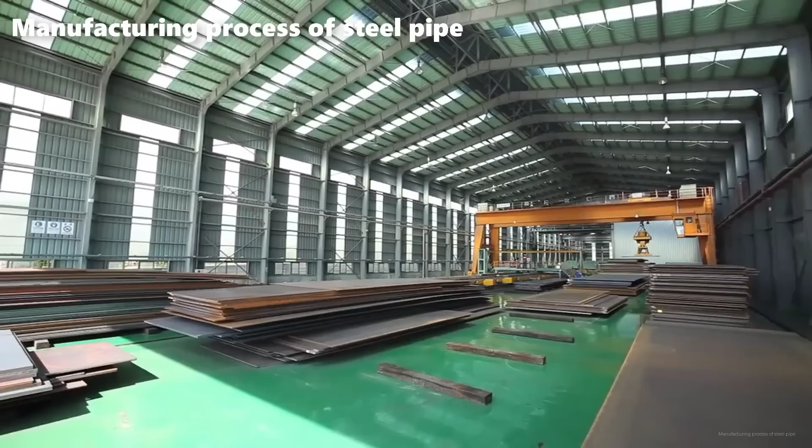The process begins with the raw materials, steel coils. These coils are typically stored in large warehouses. To start the manufacturing process, a magnet lifter is used to safely and efficiently transport the steel coils to the next processing stage.

Once the steel coils are in position, they go through an edge milling machine. This machine is designed to remove any irregularities or imperfections from the edges of the steel strip, ensuring a smooth and uniform surface. It also trims the edges to the required width.

After edge milling, the steel strip is passed through a pre-bender machine. This machine pre-bends the edges of the strip to the desired curvature, making it easier to form into a circular shape in later stages. The pre-bent steel strip is then fed into the infeeder machine.

This machine guides the strip into the next critical step, the JCO, J-ing, C-ing, and O-ing press bending machine. This machine takes the pre-bent steel strip and transforms it into the fundamental U-shaped configuration. The hydraulic forces exerted on the steel strip gradually mold it into this U-shaped form, laying the foundation for the eventual creation of the pipe.

The accuracy and consistency achieved by the JCO press bending machine are essential for ensuring that the pipes meet strict dimensional and structural requirements, ensuring their integrity and performance in various applications.

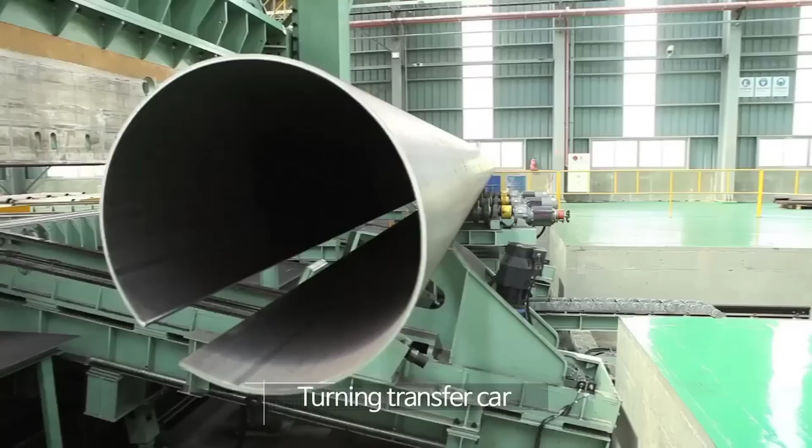Once the U-shaped steel is formed, a turning transfer car moves it to the next stage. This car rotates the steel section to prepare it for welding.

In this step, the U-shaped steel is tack welded along its length. Tack welding holds the steel section in its circular shape temporarily, allowing for further processing.

The tack-welded steel section is then passed through an inside welding machine. This machine creates a continuous weld seam along the inside of the steel section, ensuring a strong and leak-proof joint.

After the inside welding, any excess weld material or imperfections are removed using a back bead cutting machine. This step ensures a smooth interior surface, which is essential for efficient fluid flow and reduced friction.

The exterior welding process is similar to inside welding, but is done on the outer surface of the steel section. It creates a continuous weld seam along the outside, strengthening the pipe's structure.

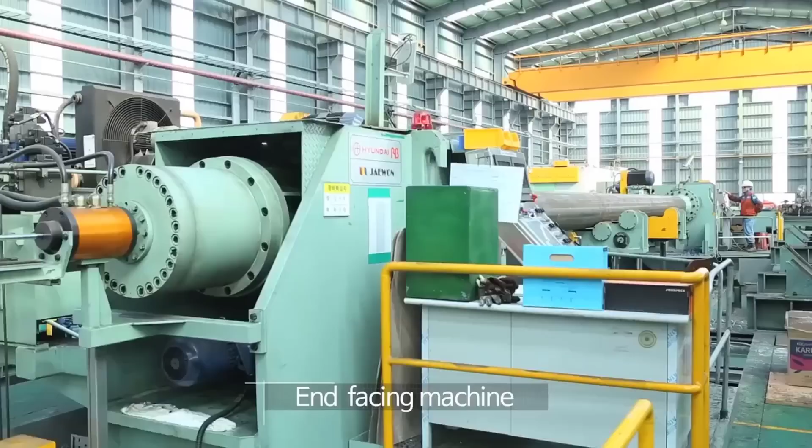To prepare the pipe ends for connection or welding with other pipes, an end-facing machine is employed. It trims and bevels the pipe ends to the specified angle and dimensions.

Before proceeding to the final inspection stage, the pipes go through a washing device to remove any contaminants and ensure cleanliness. Pipes are examined for any internal defects, weld quality, and dimensional accuracy using X-ray technology. This ensures that the pipes meet the required quality standards.

After successfully passing the X-ray test, the steel pipes are ready for packaging and shipment to customers. This comprehensive manufacturing process guarantees the production of high-quality steel pipes that meet industry standards and perform reliably in various applications.

The production begins with the automatic feeding of bars into the production line. A specially designed magazine ensures a continuous supply of bars, which are the initial raw material for the bullet shell manufacturing process.

The bars are then subjected to inductive heating using the BBC Brown Boveri installation. This installation, with a power of 1,450 kilowatts and a heating frequency of 500 Hz, employs electromagnetic induction to heat the bars uniformly. This controlled heating process enhances the malleability of the steel bars, making them more amenable to subsequent shaping.

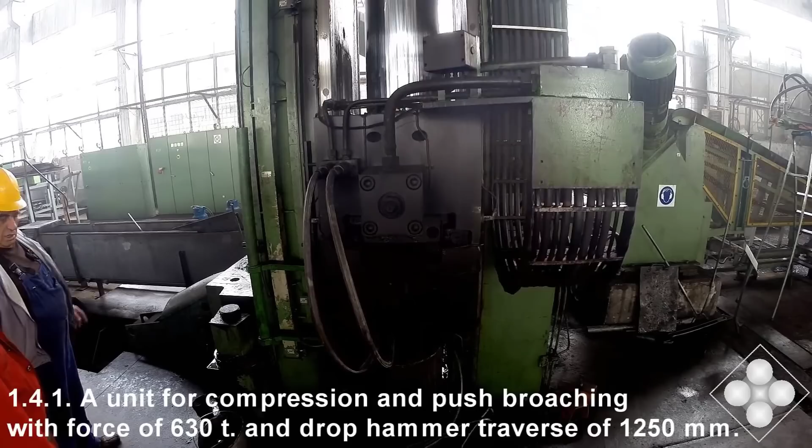The heated steel bars, now pliable, are passed through a FICEP hydraulic press shear. This hydraulic press shear is equipped to cut through bars with diameters of up to 130 millimeters. This step is crucial in obtaining uniform lengths of the heated bars for further processing.

The cut bars are then forwarded to the EUMUCO hydraulic press, where the actual forging of the steel shell casings takes place. This press consists of 2 units working in tandem.

One unit of the EUMUCO press focuses on compression and push broaching. With an impressive force of 630 tons and a drop hammer traverse of 1,250 millimeters, this unit shapes the heated steel into preliminary casing shapes. The intense force exerted ensures the formation of accurate and precise designs.

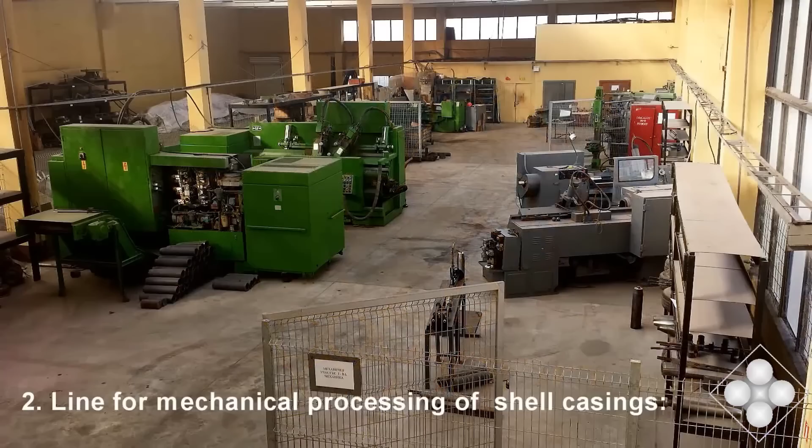The second unit of the EUMUCO press is responsible for the drawing process. Equipped with rolls and rings, this unit calibrates the forged shell casings to achieve the desired dimensions. The force applied is 200 tons, and the drop hammer traverse extends to 3,200 millimeters, allowing for intricate shaping.

Once the forged shell casings are shaped, a robotized stacker arranges the hot casings onto pallets. This automated stacking process ensures efficient and consistent arrangement, preparing the casings for normalization.

The normalized shell casings then proceed to a line dedicated to their mechanical processing, where precision and accuracy are paramount. Within this line, the GF programmable hydrocopying lathe takes center stage. This advanced machine is designed for shell casing turning with exceptional efficiency. The lathe's programmable nature allows for precise control over the turning process, ensuring uniformity and quality across all casings.

To sustain the production flow, an automated magazine for billet charging is employed. This magazine ensures a constant supply of billets for processing, streamlining the entire production process.

In an auxiliary role, an EMA Elektro-Maschinen-Schultz GmbH inductive heating unit, with a power of 375 kilowatts and a frequency of 1,000 Hz, contributes to heating and shaping specific components of the bullet shells.

For specialized bending of shell casings, the Usine de Wecker vibrating forging press comes into play. This press introduces controlled vibrations to achieve precise bends in the shell casings as needed.

The journey of a razor blade begins with the pressing of raw materials. Typically, stainless steel strips are cut into smaller blanks, which are then subjected to a high-pressure pressing process. This initial step shapes the blanks into the fundamental blade structure.

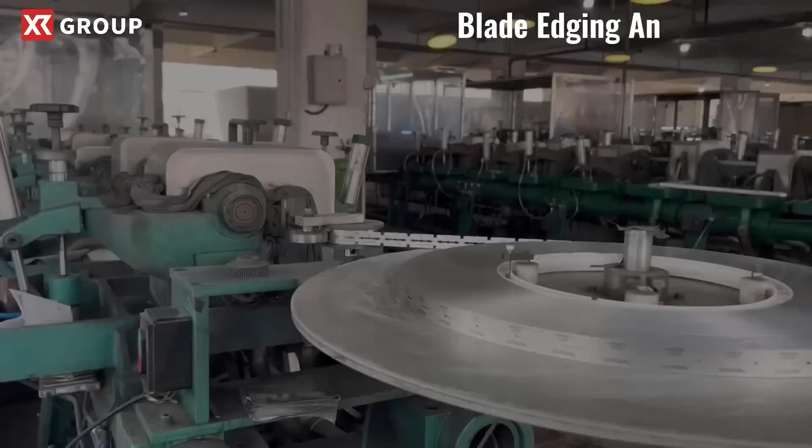To achieve the razor-sharp edge that consumers expect, the blades must undergo precise edging and polishing. Advanced machinery and abrasive materials are used to refine the blade's edge, ensuring it is both sharp and smooth.

Quality control is paramount throughout the production process. Skilled technicians inspect each blade for defects, imperfections, or deviations from the required specifications.

Blade coating is an important step that enhances the blade's performance and prolongs its life.

Sintering is a critical process that involves heating the blades to high temperatures to further strengthen the metal's crystalline structure. This step ensures the blade remains durable and sharp throughout its lifespan.

To guarantee the blades meet stringent quality criteria, a sharpness test is conducted. This test measures the blade's cutting ability, ensuring that it can provide a close and comfortable shave without causing irritation or nicks. Razor blades are susceptible to corrosion, which can significantly reduce their lifespan.

To prevent rusting, the blades are carefully soaked in anti-rust oil. This protective coating ensures the blades remain in pristine condition until they reach the hands of the consumer.

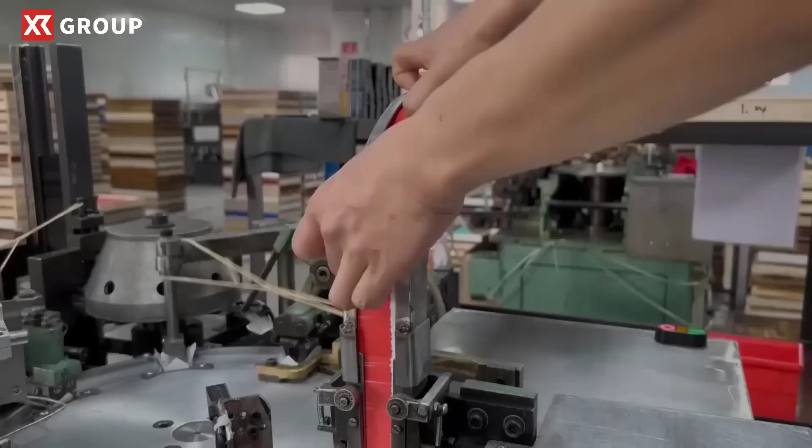Once the blades have passed all quality checks and treatments, they are carefully packaged. Packaging materials are chosen to maintain the blade's hygiene and sharpness until they are opened and used by the consumer.

Once the steel sheets are flattened, they are cut into specific sizes according to the required drum dimensions. This is usually done using a shearing machine or a laser cutting machine.

The cut sheets are then transferred to a forming machine, where they are shaped into cylindrical bodies. The forming machine utilizes a series of rollers and presses to shape the sheets accurately.

The first step is to design the lid according to the specifications and requirements of the barrel. This includes determining the lid's dimensions, shape, and any additional features such as handles or vent holes.

The iron sheets are fed into a stamping press, which consists of a hydraulic or mechanical system capable of exerting high pressure.

Once the initial stamping is complete, the lid may require additional processes such as trimming and piercing. Trimming removes any excess material from the edges of the lid, ensuring a clean and precise shape.

After stamping, the lids undergo surface treatment to protect them from corrosion and enhance their appearance. The surface treatment can include cleaning, degreasing, and applying coatings such as paint, powder coating, or galvanizing.

After the cylindrical bodies are formed, the next step is to join the two ends of the body to create a drum. This is done through a process called seaming.

The edges of the cylindrical bodies are folded and interlocked, creating a secure and leak-proof joint. The seaming process is usually automated, using specialized seaming machines. In addition to seaming, welding may also be employed to strengthen the joint further.

Once the seaming process is complete and the cylindrical body of the steel drum is formed, it requires the addition of a bottom and top ring for structural stability and reinforcement. These rings play a crucial role in ensuring the overall integrity and durability of the drum.

The bottom and top rings are typically made of thicker gauge steel compared to the drum body. This is done to provide enhanced strength and rigidity to the drum, as the rings are subjected to significant stress and impact during handling, stacking, and transportation.

In this stage, the various components of the steel drum, including the body, bottom and top rings, closure mechanisms, and handles, are assembled. The closure mechanisms can include various options such as bolted rings, lever lock closures, or drum plugs. Once assembled, the drums undergo rigorous testing to ensure their integrity, including leak testing, pressure testing, and load testing.

Before painting, the barrel's surface needs to be properly prepared. This typically involves cleaning and removing any dirt, oil, rust, or old paint. Surface preparation can include methods such as sandblasting, chemical cleaning, or mechanical abrasion to ensure a clean and smooth surface.

To enhance adhesion and improve paint durability, a primer is applied to the surface. The primer acts as a bonding agent between the metal surface and the paint layer. It also provides additional protection against corrosion. The primer is evenly sprayed or applied using a brush, ensuring complete coverage.

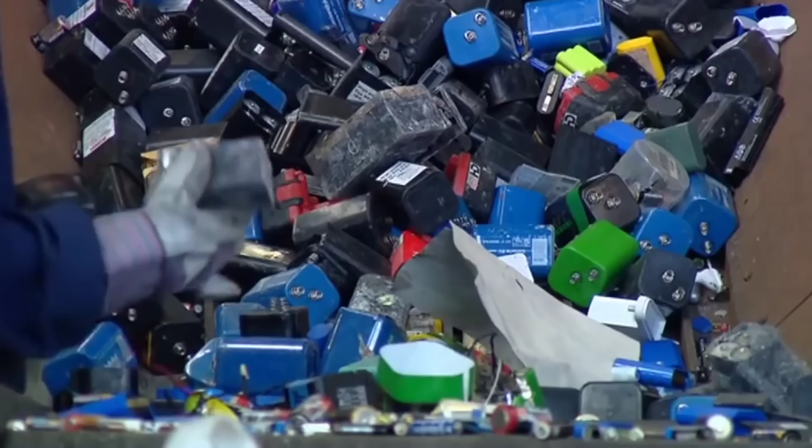After this initial sorting, the different types of batteries are further sorted manually. Lead batteries are separated from lithium batteries, and consumer batteries, including both non-rechargeable primary batteries and rechargeable secondary batteries, make up the majority of the batteries treated in this facility.

During the sorting process, any electronic waste, cable foils, and foreign materials that are not part of the battery composition are removed. Even small button batteries containing mercury are sorted out and processed separately.

Once the batteries have been sorted, the consumer batteries are further separated based on their metal content, including alkaline, iron, zinc, and manganese. The recycling process begins by filling each group of consumer batteries into containers, which are then mixed in equal proportions.

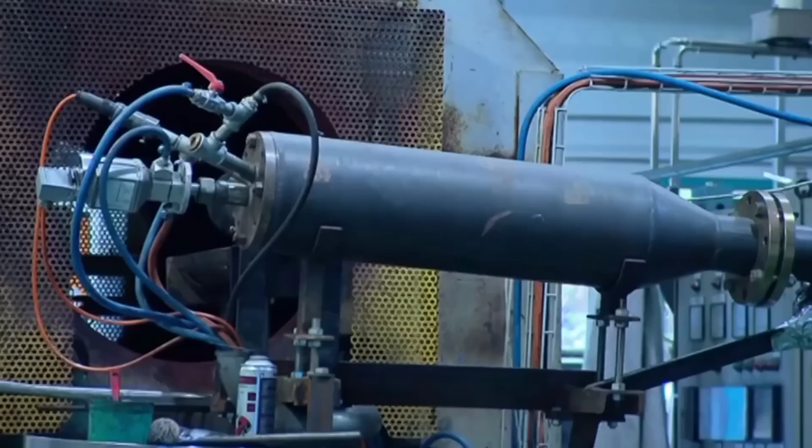The container mixture is subjected to pyrolysis in an oven heated to 700 degrees Celsius. During this process, certain ingredients are dissolved from the battery materials, water evaporates and is removed, and paper, plastics, and coal burn. To ensure safety, highly toxic furans and dioxins are filtered out.

Through pyrolysis, valuable materials are obtained. Zinc, which constitutes around 23% of a consumer battery, is skimmed off and processed in zinc smelters. The extracted zinc has its own value listed on the stock exchange.

In some batteries, mercury is released during pyrolysis, and it is captured in filters. Due to its highly toxic nature, mercury must be treated separately. In a separate facility, the mercury is separated from the filters and button batteries, and it is collected in its pure form for return to the industry.

After pyrolysis, consumer batteries may appear as charred scraps since some materials have already been removed. However, they are valuable homogeneous materials. A final processing step takes place in another melting furnace, which reaches a temperature of 1500 degrees Celsius, twice as high as the first facility.

At this point, the molten metal is tapped by workers wearing asbestos protective clothing. The molten mass flows into molds and cools within minutes. The resulting product is a metal alloy called ferromanganese, composed of iron and manganese. Ferromanganese is commonly used in the metal industry to regulate the hardness of steel.

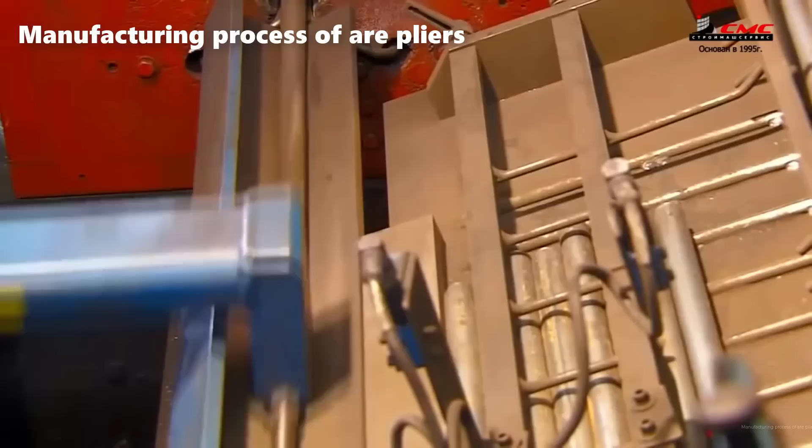This intricate process begins with a metal blank, the starting point for all parts. Skilled metalworkers kick off the transformation in a potent electric melting furnace where steel is rapidly heated to extreme temperatures. Within seconds, the metal reaches a malleable state, ready for its metamorphosis.

Subsequently, the heated steel is carefully placed onto a stamped mold, and an immense press exerts tons of force, shaping the blank into the desired form. It's a meticulous process that may require up to 4 strikes for each blank to achieve its final shape.

To ensure the pliers' strength and durability, they undergo a crucial heat treatment process known as hardening. The plier halves spend a grueling 2 hours inside a gas furnace, where temperatures soar beyond 800 degrees Celsius. Following this, they are rapidly and uniformly cooled by immersion in salty water.

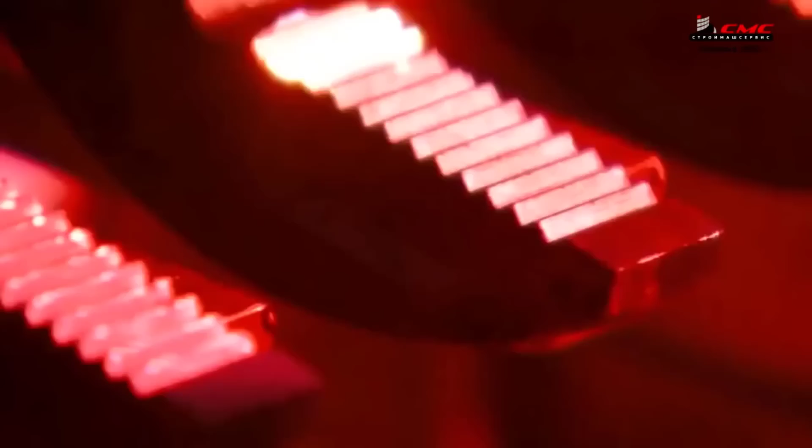These teeth on the pliers, designed to withstand heavy-duty tasks, receive additional fortification through laser treatment, enhancing their hardness and toughness.

Now the pliers are ready for the assembly phase. Creating a pair of pliers is relatively straightforward. A worker inserts a pivot and joins both halves. Then, the pivot is securely fastened at high speed using a machine that applies significant force and friction.

The process differs slightly for slip joint pliers. These tools undergo a unique treatment, beginning with placement under a press that employs heat and high pressure to firmly clamp the pivot. Workers then insert the slip joint pliers between two grinding wheels using an emulsion to prevent overheating. The pivot is ground down until it becomes level with the surface of the pliers.

Subsequently, these pliers are sent to a gas furnace for another 2-hour heat treatment, a crucial part of the tempering process. After removal from the furnace, they are immersed in an oil solution, a departure from the rapid cooling in salty water employed for regular pliers.

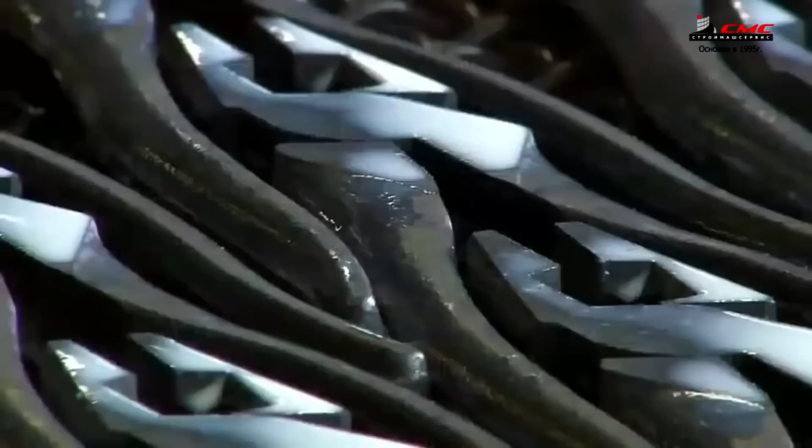Steel is an exquisite material, making meticulous heat treatment essential to avoid compromising its quality.

Post-heat treatment, the pliers are immersed in a bath filled with an anti-corrosion solution, safeguarding the steel from rust while lubricating the pivot. A robotic arm takes charge, lifting the pliers to a grinding belt that smoothens all surfaces except the handles. Subsequently, the company's logo and product number are etched onto the pliers with precision using a laser.

Before dipping into liquid vinyl, hundreds of pliers are preheated to ensure the coating adheres seamlessly to the steel. This protective coating hardens when exposed to heat and remains on the handles, enhancing their grip and usability.

The first step in the wrench manufacturing process is the selection of the appropriate raw materials. Wrenches are typically made from high-strength steel alloys. The choice of material depends on the desired properties of the wrench, including strength, durability, and resistance to corrosion. Alloy steel is a common choice due to its excellent balance of strength and toughness.

The forging process is a critical step in the production of wrenches. After carefully selecting the raw steel materials, they are subjected to intense heat, typically at temperatures exceeding 2000 degrees Fahrenheit, 1093 degrees Celsius. This extreme heat makes the steel more malleable, allowing it to be shaped with precision.

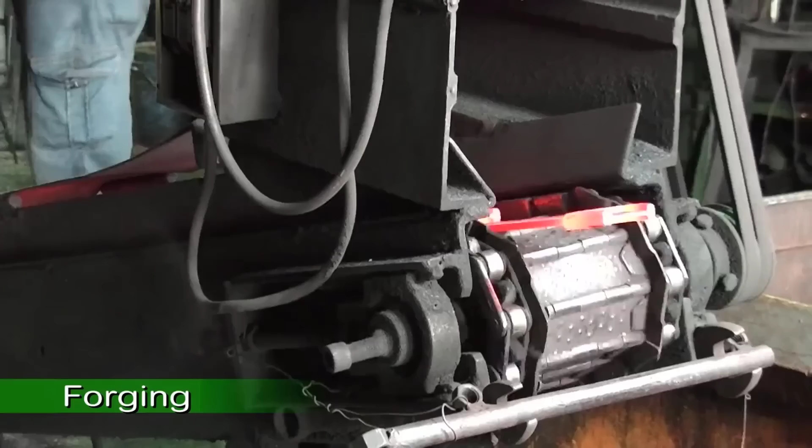Once at the correct temperature, the steel is placed in specialized dies and subjected to immense pressure. This pressure forces the steel into the desired shape, aligning its grain structure in the process. This alignment enhances the mechanical properties of the steel, significantly increasing its strength and durability.

After forging, the rough wrench blanks undergo chemical grinding. This process involves removing excess material and refining the shape of the wrench heads. Chemical grinding ensures that the wrenches have precise dimensions and a smooth, uniform surface.

Polishing follows chemical grinding, where the wrenches are carefully smoothed to achieve a high-quality finish. This step not only enhances the wrench's appearance, but also prepares the surface for subsequent processes, such as plating.

Stamping is a crucial step in the wrench manufacturing process, as it involves imprinting important information on the wrench, such as the brand name, model number, and size. This information is essential for product identification and traceability.

Heat treatment is another critical process used to enhance the mechanical properties of wrenches. Wrenches are heated to specific temperatures and then rapidly cooled to achieve the desired hardness and toughness levels. Proper heat treatment ensures that the wrenches can effectively grip nuts and bolts without breaking or deforming.

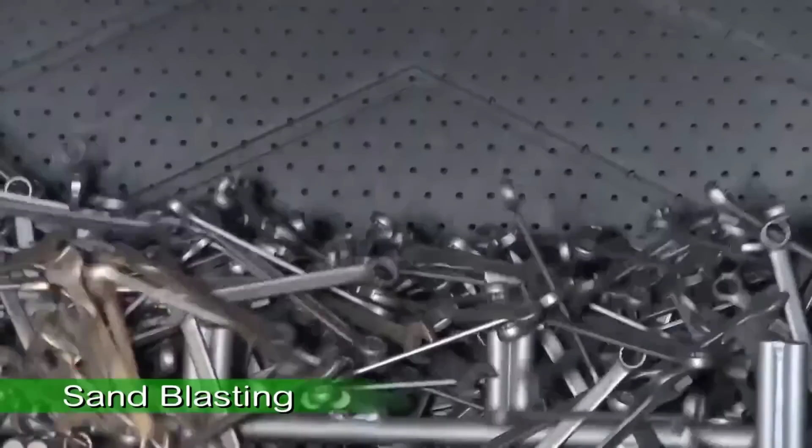Sandblasting is employed to prepare the surface of the wrenches for plating. This process involves propelling abrasive particles against the surface at high velocity, effectively removing any remaining impurities and creating a textured surface that promotes adhesion during the plating process.

After sandblasting, another round of chemical grinding may be necessary to refine the surface further. This ensures that the wrenches are free of imperfections and have a smooth, uniform finish. In this step, the open end of the wrenches is precisely ground to create the distinctive profile and functional features. Open-end grinding ensures that the wrenches have the correct geometry for effectively gripping nuts and bolts.

Prior to plating, the wrenches undergo a thorough cleaning process to remove any residual contaminants, oils, or residues. This step is crucial to ensure the plating adheres properly and produces a durable, corrosion-resistant finish.

Plating is a critical surface treatment that enhances the wrench's corrosion resistance and appearance. Chrome plating, for example, not only provides a protective layer but also imparts a shiny finish to the wrenches. Different plating methods and materials may be used based on the specific requirements of the wrenches and market demands.

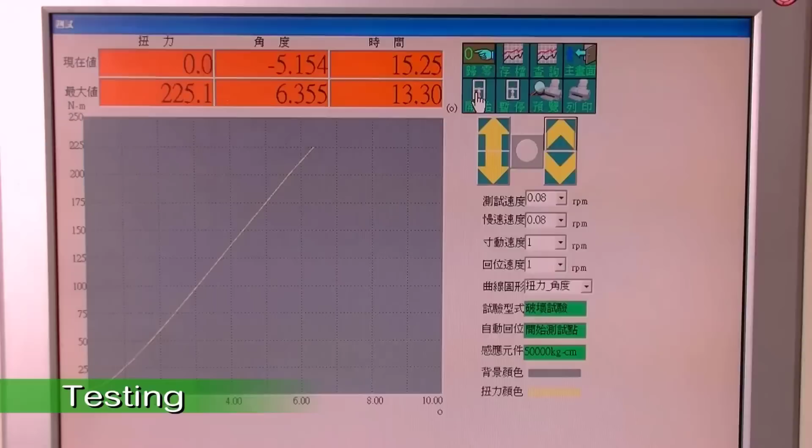Quality control is paramount in the wrench manufacturing process. The finished wrenches undergo rigorous testing to ensure that they meet specified standards. Testing may involve dimensional measurements, hardness testing, torque testing, and visual inspections. Each wrench must pass these tests to ensure that it will perform reliably in various applications.

Once the wrenches have passed all quality checks and inspections, they are carefully packaged for distribution. Packaging methods can vary depending on the intended market and customer preferences.

The process begins with a round bar, or preform, which is heated to the appropriate forging temperature. The heated material is then fed into the ring blank press, where it undergoes several operations. The press exerts immense force to compress and shape the material into a cylindrical shape, thereby forming the initial ring blank. The ring forging machine Radial 8005001, manufactured by SMS Meer, is a highly advanced piece of equipment used for the process of ring rolling.

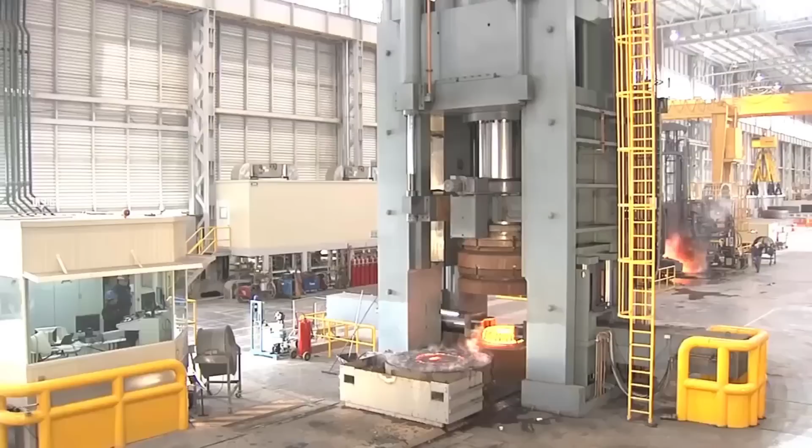The heated workpiece is carefully placed into a specialized machine known as a ring blank press. The ring blank press is designed to apply immense pressure to the heated material, using a series of compressive forces. The workpiece is positioned between two die halves or platens within the press.

As the press closes, the material is subjected to extreme pressure, causing it to deform and take on a cylindrical shape. This intense pressure facilitates the formation of the initial ring blank with the desired dimensions.

The pressing operation in the ring blank press is crucial in shaping the material accurately and achieving the required cylindrical form. The amount of pressure applied and the duration of the pressing process are carefully controlled to ensure the workpiece reaches the desired shape while maintaining the necessary structural integrity.

The ring blank press plays a vital role in the initial stages of the ring rolling process, providing the foundation for subsequent steps. Once the ring blank is formed, it is transferred to the ring rolling machine, where it undergoes further deformation and shaping to achieve the final rolled ring product.

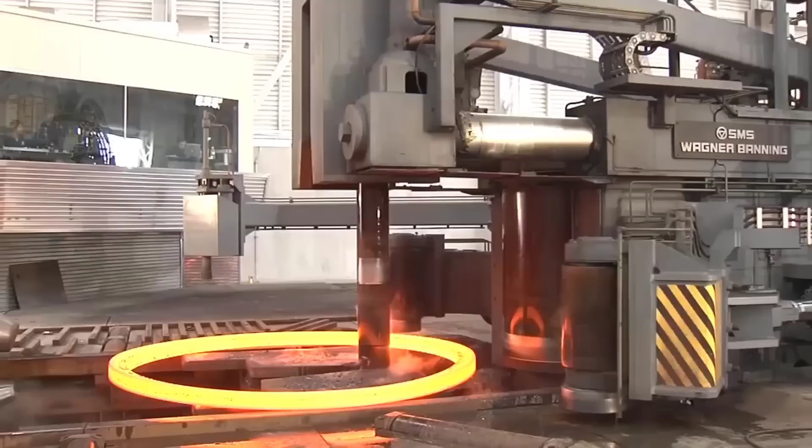This controlled deformation results in a ring with precisely controlled wall thickness and diameter. The axial profiling technology also permits the production of complex shapes and profiles within the rolled rings. By adjusting the axial forces and roller movements, the machine can create flanges, grooves, and other intricate features as per the desired specifications.

The RAW 8000 5001, designed for high productivity, boasts a rolling capacity of up to 8,000 mm in diameter and 500 mm in height. The machine operates at high speeds, facilitating efficient production of rings in both large and small sizes.

Watering is usually done through watering systems integrated on the rolling mill. Water is sprayed onto the material and the contact area between the material and the rollers to ensure effective cooling and lubrication. Through the use of water, ring rolling can be performed with high efficiency, and a better final winding quality is achieved.

The steelmaking industry is known for its rigorous demands on equipment reliability, product quality, and overall plant availability. In this context, robust and dependable drive technology plays a crucial role in achieving high-quality steel products and ensuring uninterrupted plant operations over decades.

One company that has excelled in this field is SMS SIEMAG, which specializes in the development, design, and manufacturing of drive systems and components for steelmaking plants and rolling mills. SMS SIEMAG's drive solutions are a product of the synergy between metallurgical plant know-how, rolling mill technology, and cutting-edge gear design. The company's commitment to quality and innovation is reflected in its product range, which encompasses all drive systems required for both hot and cold rolling mills, as well as steelmaking plants.

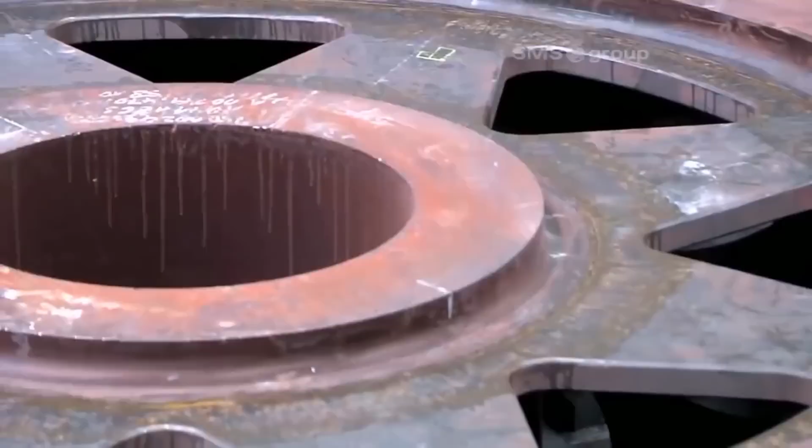A cornerstone of SMS SIEMAG's approach is its emphasis on producing essential drive components in-house. Their main drive gears, mill pinion gears, twin drive gear units, and other critical components are developed and manufactured entirely at their facilities in Germany. This vertical integration allows the company to maintain strict quality control and ensure short delivery times for their customers.

Recent investments of over 80 million euros have been directed towards expanding SMS SIEMAG's Hilchenbach workshop. This expansion includes the establishment of a new gear-making shop, which consolidates major manufacturing steps for large gear units. With state-of-the-art machinery, this workshop can fabricate gears with modules up to 40 and diameters up to 6 meters.

The manufacturing process starts with mechanized submerged arc welding, followed by stress relief and precision milling under qualified supervision. The case hardening process is a pivotal step as it imparts durability to the gears.

This is exemplified by the case hardening of a double helical spur gear weighing approximately 45 metric tons and boasting a diameter of 4.5 meters. Ultrasonic testing of gear teeth ensures their quality, followed by tooth flank grinding on profile grinders. The resulting gears undergo high-precision testing on dedicated gear measuring machines.

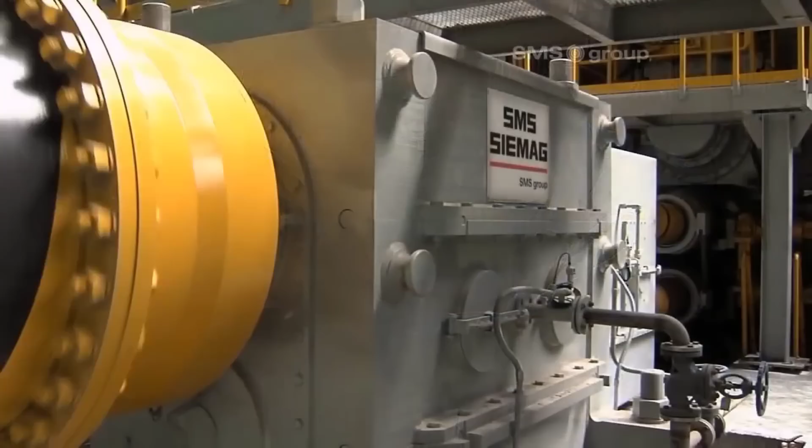SMS SIEMAG's commitment to excellence extends to gear housings, which are also produced in-house. The entire gear unit is pre-assembled, and gear contact patterns are meticulously adjusted using eccentric sleeves. These sleeves, controlled by computer-aided programs, enable precise adjustments of the gear contact pattern and tubing clearance even after years of operation.

The testament to SMS SIEMAG's expertise lies in its ability to offer tailored modernization solutions. At Aleris Aluminum in Koblenz, Germany, the company replaced the entire drivetrain within a few days. The highlight of this revamp was the installation of a twin-drive gearbox without interrupting plant operations. The new drive and motors were mounted on a foundation block and moved seamlessly to replace the old drive unit after successful function tests.

SMS SIEMAG's drive components are designed according to stringent in-house standards using advanced tools, including 3D CAD systems and specialized calculation programs. The company's well-structured work schedules and production control interfaces facilitate rapid implementation of designs. Production is carried out by highly qualified and experienced employees, many of whom have completed vocational training with SMS SIEMAG.

Comprehensive service plans offered by SMS SIEMAG ensure ongoing drive performance. These plans encompass extensive inspection services and monitoring systems that utilize temperature, torque, and vibration data for preventive maintenance. From development and design to in-house manufacturing, assembly, project management, electrical and automation systems, and after-sales service, SMS SIEMAG offers comprehensive drive engineering solutions from a single source.

SMS SIEMAG stands as a paragon of drive technology excellence in the steelmaking and rolling mill industry. Their integrated approach, investment in cutting-edge facilities, and commitment to quality ensure that their drive solutions not only meet the highest demands, but also contribute to the sustained competitiveness of their customers. Through a combination of process knowledge and gear design expertise, SMS SIEMAG paves the way for top-quality products and the seamless operation of steelmaking plants and rolling mills for generations to come.

The company maintains an impressive production capacity, churning out between 1 million and 1,100,000 machetes each month. Their self-sufficiency in sourcing materials is evident, with steel primarily imported from England or Korea. This steel undergoes a meticulous transformation process, encompassing cutting, marking, rolling learned from their German partners, forming, heat treatments, tempering and quenching, polishing, sharpening, individual straightening, lacquering for rust protection, packaging, and sales.

With a workforce of around 900 to 910 employees, Incolma's core focus lies in safeguarding its market share in Colombia's machete market. Although their ultimate aim is global expansion, they have tailored approximately 850 machete models to cater to the unique preferences of farmers worldwide, prioritizing customer familiarity, quality assurance, competitive pricing, and adaptability to regional variations.

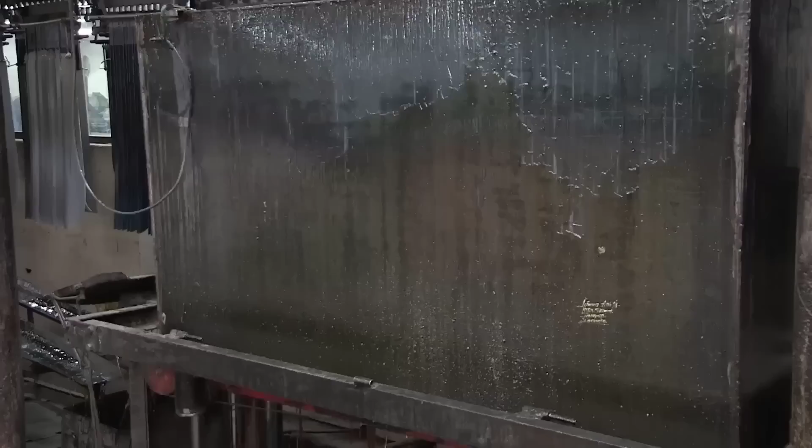Incolma's export markets have solid roots in Latin America and extend into emerging markets like Africa and other regions. Their global reach encompasses Ivory Coast, Ghana, Liberia, South Africa, Papua New Guinea, Namibia, Lithuania, the Democratic Republic of the Congo, with potential prospects in New Caledonia, Fiji, and Equatorial Guinea.

They proudly claim the title of the world's largest individual machete plant.

The manufacturing process begins with the selection of high-quality raw materials. Specialized steel wire, known for its strength and durability, is used as the base material. This wire is meticulously inspected for any defects or impurities before it proceeds to the next step.

Next, the steel wire is passed through a series of machines that shape it into a razor blade form. This process involves precision cutting and welding to create the distinctive razor-like barbs. These barbs are designed for both practical functionality and aesthetic appeal, ensuring the final product not only provides security, but also looks visually appealing.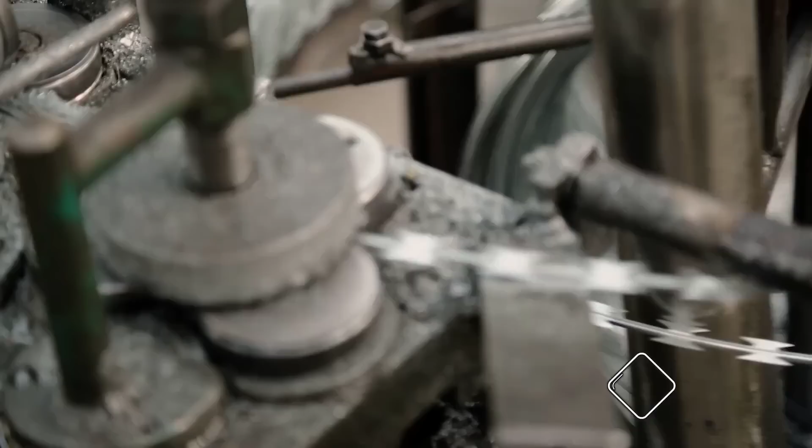Once the razor blades are formed, they are welded onto a wire mesh to create the razor mesh fence panels. The mesh spacing and the density of the razor blades can be customized to meet the specific needs of customers. This flexibility allows for the production of fence panels suitable for various applications, including guarding fences, doors, windows, and military installations.

The manufacturing process begins with the preparation of the raw materials required for bearing production. These materials include steel or ceramic for the bearing rings, rolling elements, and cages. The materials undergo strict quality checks to ensure they meet the required specifications.

The prepared materials are then subjected to machining processes: etching, grinding, and milling. These processes shape the components to their desired dimensions and surface finish. After machining, the bearing components undergo heat treatment processes to enhance their mechanical properties. Heat treatment techniques like quenching and tempering are applied to improve hardness, strength, and resistance to wear and fatigue.

During the assembly of bearings, each component is meticulously handled to ensure precise alignment and optimal performance. The inner and outer rings, which encase the rolling elements, are carefully fitted together to create the bearing structure. The rolling elements, such as balls or rollers, are precisely positioned within the rings to enable smooth and efficient rotation. The cages, made of steel or synthetic materials, maintain proper spacing and guidance for the rolling elements.

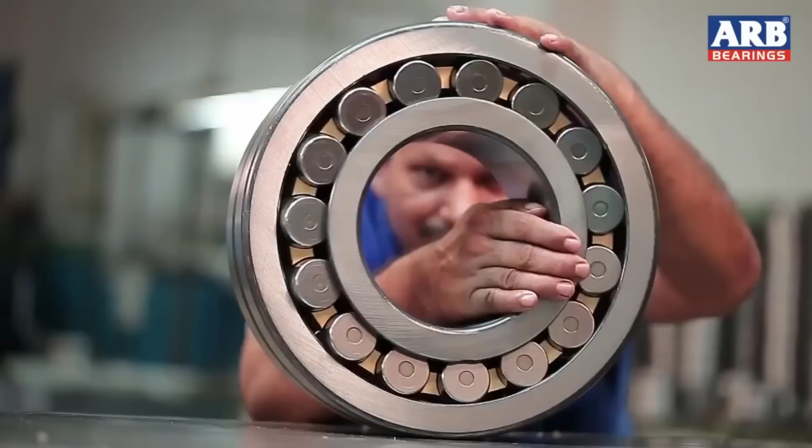Special attention is given to lubrication during assembly to reduce friction and prevent premature wear. Proper alignment and lubrication are essential factors in ensuring the longevity and reliability of the bearings. Once the bearings pass the quality control tests, they are packaged securely to protect them from damage during transportation.

The first step in the manufacturing process is the careful selection of balls. The balls used in these bearings are typically made of high-quality steel or ceramic materials. These balls must meet strict specifications in terms of size, roundness, and surface finish. They are carefully inspected and sorted to ensure uniformity and consistency in performance.

Once the balls have been selected, the next step is to join the inner and outer rings of the bearing. The rings are typically made of steel and are precision machined to the required specifications. They are then carefully assembled using advanced techniques such as precision welding or press fitting. This process ensures a tight and secure fit between the rings, providing stability and durability to the bearing.

After the rings are joined, the balls are fitted into the raceways created between the inner and outer rings. This step is crucial for achieving smooth rotation and minimizing friction. The balls are evenly distributed around the raceways, and their size and position are carefully controlled to ensure optimal performance. Advanced machinery and precise measurement tools are used to achieve accurate ball fitting.

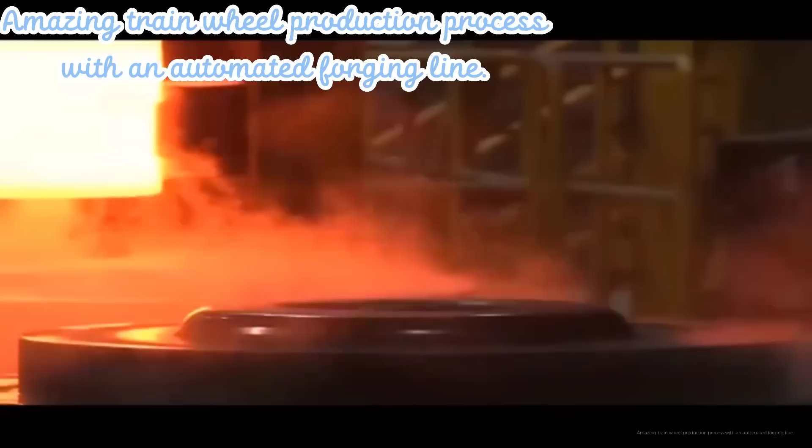The process begins with the loading manipulator, which carefully positions the raw material, known as the blank, in the exact center of the press dies. Once in position, the press, boasting an incredible 9,000 tons of pressing force, initiates the forming process. The stroke of the press upsets the blank, shaping it into the desired profile for the wheel rolling process. This crucial step sets the foundation for the subsequent stages of production.

After the forming process, the sliding table moves the profile blank for further processing. At this point, the first transfer manipulator comes into play, removing the blank from the press and transferring it to the next phase.

Automation takes center stage as 3 industrial robots take charge of cooling and lubricating the press's controlled axes. This ensures smooth and efficient operation during the entire production cycle.

During the rolling process, the wheel blank is guided solely by web rolls, pressure rollers, and lateral rolls, without the need for a mandrel. This state-of-the-art wheel rolling technology optimizes material flow and enhances the overall quality of the wheels. Additionally, the system allows for online adjustments to the tool settings, enabling real-time optimization of the production process.

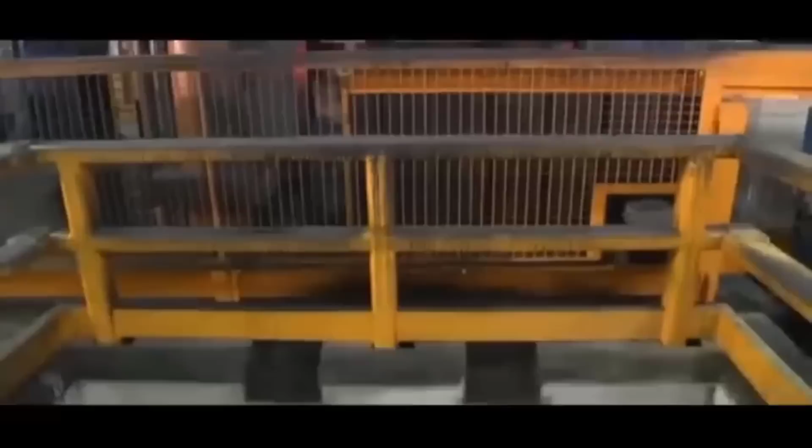The press dies undergo automatic cooling and lubrication, facilitated by advanced technology. Furthermore, a marking device equipped with an innovative needle embossing tool adds identification text to each wheel. An oscillating needle precisely embosses the required markings, ensuring accurate and reliable identification throughout the wheel's lifespan.

Once the wheel is marked, it is transferred to the wheel measuring machine. The latest 3D laser technology is employed for precise and comprehensive measurements. This advanced measuring process captures every intricate detail, ensuring that the wheels meet the highest quality standards. An automation and piece tracking system continuously monitors the production, documenting and archiving the product quality for future reference.

The Rolltech Wheels technology software plays a vital role in this automated production line. It ensures the perfect setting of the forming machines, allowing for maximum efficiency and precision.

With this seamless integration of technology, the system has the capability to produce an impressive 280,000 wheels per year. These wheels have outer diameters ranging from 700 to 1,350 millimeters, catering to various railroad applications.

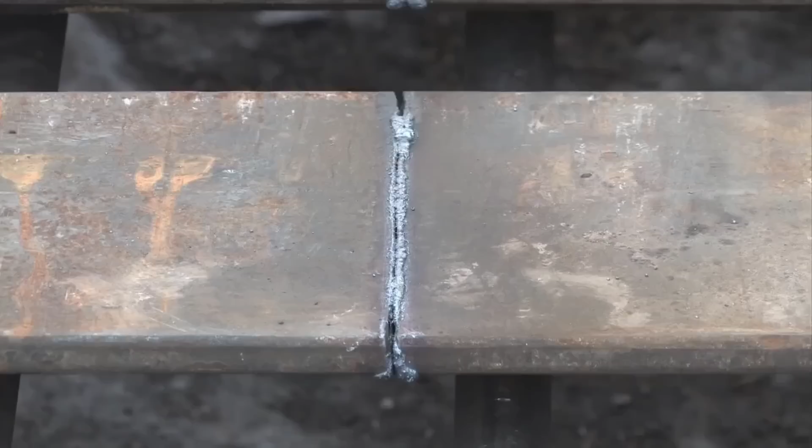This high level of cleanliness is a testament to the precision and effectiveness of the shot peening process and makes the coil springs ready for subsequent processing steps, such as powder coating or any other finishing processes required.

The first step in shovel production involves melting the raw materials to create a molten steel alloy. This process occurs in a specialized facility, such as a steel foundry, where precise control of temperature and composition is crucial. The molten steel is then poured into molds to create the shovel's initial shape. This can be done using various casting methods, including sand casting or investment casting, depending on the manufacturer's techniques and capabilities.

Once the initial shape is achieved through casting, the shovel undergoes a critical step: forging. Forging involves shaping the shovel further by applying pressure and heat. This process not only refines the shovel's form but also enhances its mechanical properties, making it more durable and resistant to bending or breaking. After forging, the shovel is subjected to a heat treatment process that involves controlled heating and cooling cycles to optimize its hardness and toughness.

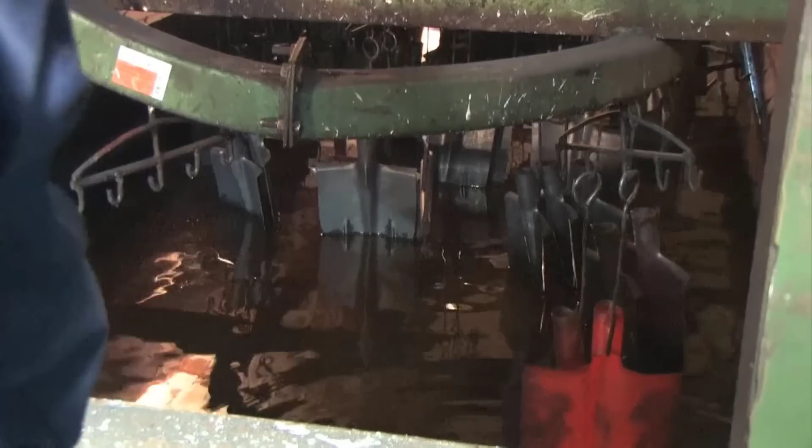To protect the rail steel shovel from corrosion and enhance its aesthetics, it is often coated or painted. This may involve the application of a rust-resistant coating, such as zinc or epoxy, which helps extend the tool's lifespan, especially when exposed to harsh outdoor conditions. Painting is typically done for branding and visibility purposes.

Throughout the production process, strict quality control measures are in place to ensure that each shovel meets the highest standards. This includes dimensional checks, hardness testing, and visual inspections. Some shovels may also undergo specialized testing, such as impact testing, to assess their resilience under extreme conditions.

After the steel has been cut and shaped, it undergoes a heat treatment process to enhance its mechanical properties. This step is crucial to achieving the desired spring characteristics. Heat treatment involves heating the steel to specific temperatures and then rapidly cooling it to achieve the desired hardness and resilience. In the case of parabolic springs, the workpieces are cleaned and descaled to remove any impurities or surface imperfections that may have occurred during the previous steps. The cleaning process ensures that the surface of the springs is ready for shot peening.

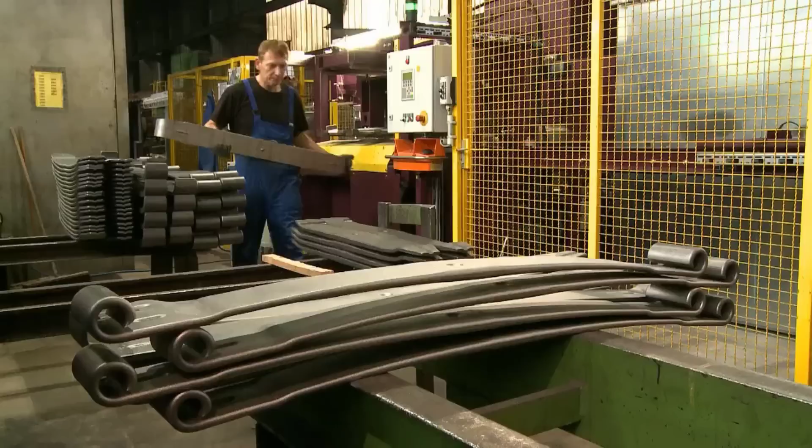Shot peening is a pivotal stage in the manufacturing process of parabolic and coil springs for rail vehicles, as it imparts additional strength and durability to these crucial components. At the onset of shot peening, the springs, which have undergone prior heat treatment and cleaning, are loaded onto a specially designed roller conveyor. This conveyor system is equipped with a closed-loop mechanism, meticulously designed to facilitate efficient loading and unloading of the springs. The closed-loop system ensures that the springs seamlessly transition through each step of the shot peening process.

Once positioned on the roller conveyor, the springs are manually placed onto carriers. These carriers serve as the vessels that will transport the springs through the shot peening unit.

To ensure that the springs remain firmly in place during the process, a protective cover is raised and secured over them. This step is vital to prevent any unintended movement or displacement of the springs, ensuring precise and consistent peening results.

Before the shot peening process begins, an essential preparatory step involves applying pre-tension to the springs. A 20-ton press force is employed, combined with a 200mm upstroke. This pre-tensioning process readies the springs for the subsequent shot peening operation, ensuring they are properly prepared to withstand the blasting force and achieve the desired hardness level.

As the springs embark on their journey through the shot peening unit, a network of sensors strategically placed along the roller conveyor comes into play. These sensors serve a critical role in ensuring the precision and consistency of the shot peening process. They automatically detect the position of the springs and activate the next steps in the process as needed, orchestrating a seamlessly coordinated workflow.

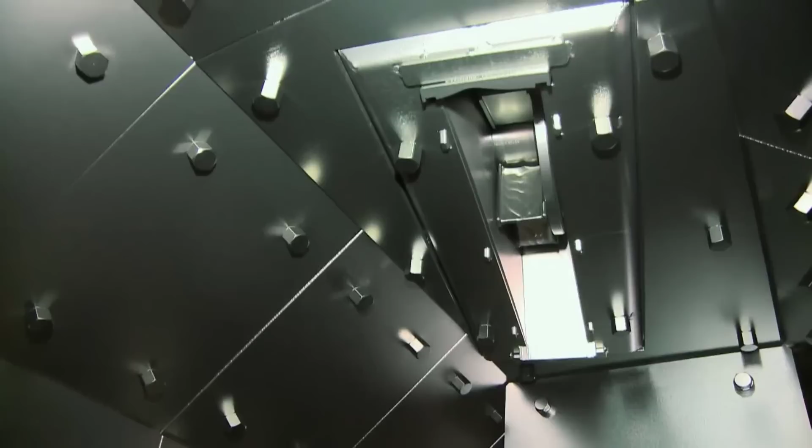The heart of the shot peening unit comprises high-performance turbines. Each of these turbines is rated at 22 kilowatts and plays a central role in delivering the blast media onto the springs. In this context, the blast media consists of rounded wire shot, chosen for its effectiveness in hardening the surfaces of the springs. The turbines precisely control the flow and direction of the blast media, directing it onto the tension side and edges of the springs.

To maintain the integrity of the shot peening process, wear-resistant rubber curtains encase the area where the springs are being blasted. These curtains effectively prevent the escape of the blast media, ensuring that it remains focused on the springs to achieve the desired hardening effect.

Additionally, noise protection booths are strategically installed in the vicinity to reduce noise levels, creating a more comfortable working environment and enhancing worker safety. An integral aspect of shot peening is the efficient management of blast media.

Dust and undersized shot can accumulate during the process, potentially affecting its quality and efficiency. To counter this, a blow-off device is employed to remove any stray blast media adhering to the springs. This media is then returned to the shot peening process loop, ensuring a continuous and sustainable use of the blast media.

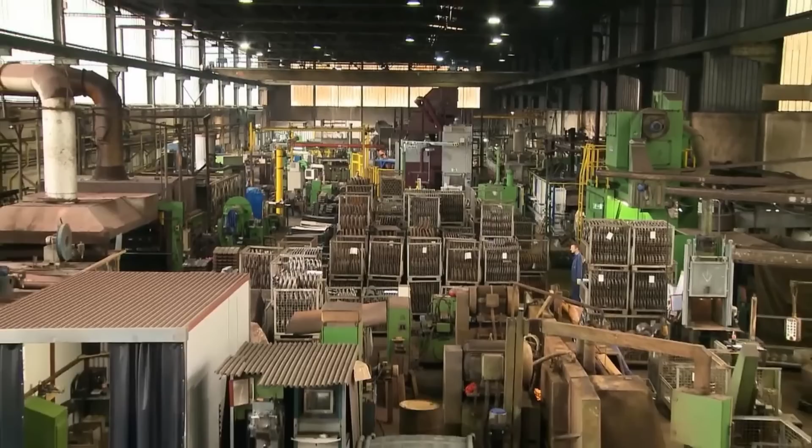The journey of coil springs through the shot peening process begins with an indoor crane. This heavy-duty machinery is responsible for transporting a batch of coil springs to the entry side of the specialized blast unit. Upon arrival at the entry side of the blast unit, a stair lift mechanism comes into play.

This innovative device is designed to facilitate the separation and correct loading of the coil springs. It ensures that each spring is positioned appropriately for the shot peening process.

Parallel conveyors and lifting beam. To achieve uniform shot peening and ensure that every part of the coil springs is thoroughly treated, 2 parallel conveyors are employed. These conveyors work in tandem with a lifting beam, which is a critical component for delivering consistent results.

The lifting beam provides the longitudinal motion necessary for precise shot peening. It is equipped with a frequency control gear motor, allowing for programmable transport speeds ranging from 1 to 4 meters per minute.

The heart of the shot peening process lies in the high-performance turbines. In this specialized blast unit, 2 robust turbines, each rated at 22 kilowatts, come into play. These turbines are responsible for delivering the blast media, which in this case is rounded wire shot. The turbines are capable of generating the force needed to propel the blast media onto the coil springs, effectively cleaning and hardening their surfaces.

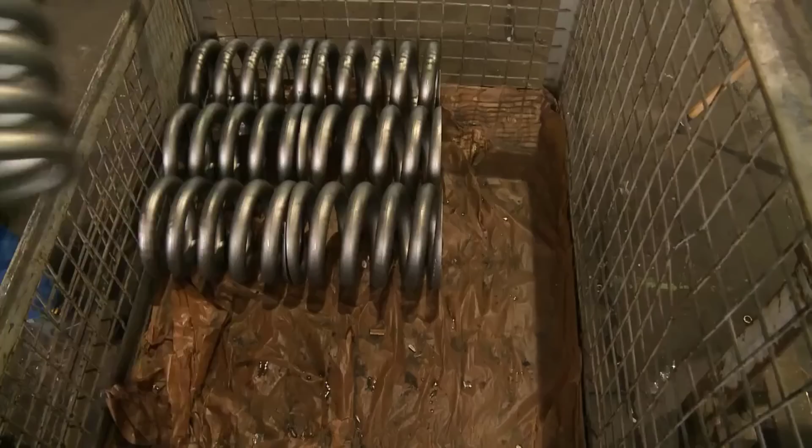One remarkable characteristic of coil springs produced through this process is their remarkable cleanliness. Shot peening not only imparts strength and durability, but also ensures that the springs are free from contaminants and surface imperfections. This high level of cleanliness is a testament to the precision and effectiveness of the shot peening process and makes the coil springs ready for subsequent processing steps, such as powder coating or any other finishing processes required.

Steel extinguishers are primarily made from high-quality steel, chosen for its strength, durability, and resistance to corrosion. The selected steel sheets undergo thorough quality checks to ensure they meet the required standards.

The steel sheets are then cut into specific shapes and sizes according to the design specifications. These sheets are typically formed into 2 halves using hydraulic or mechanical presses.

The halves are then welded together to create the cylindrical shape of the extinguisher shell. This welding process ensures a secure and leak-proof construction.

A neck ring, made of steel or brass, is attached to the top of the extinguisher shell. The neck ring serves as a connection point for the valve assembly.

The valve assembly consists of various components, including a pressure gauge, discharge lever, safety pin, and sealing gasket.

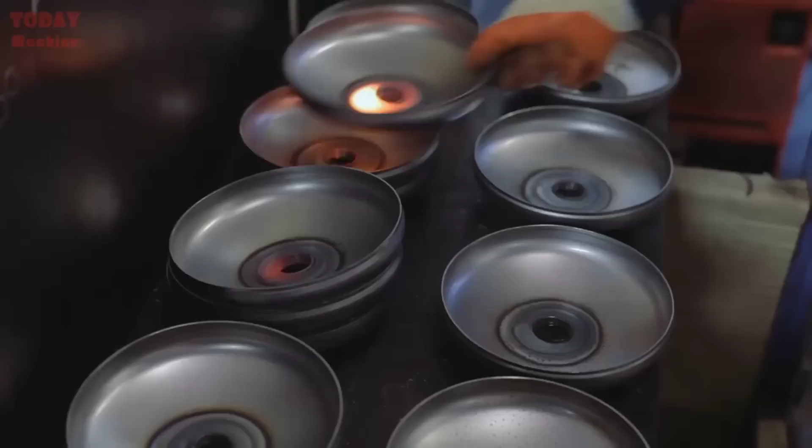Once the cylinders are formed, the seams are welded to create a seamless structure. Welding ensures the extinguisher is sturdy and airtight. The welds are carefully inspected to detect any imperfections or weak spots that could compromise the extinguisher's integrity.

The steel extinguisher bodies undergo various surface treatments to enhance their corrosion resistance and aesthetic appeal.

Before the extinguishers are ready for distribution, they undergo rigorous pressure testing to ensure their reliability and safety. The cylinders are filled with water or an inert gas, and then pressurized to a specified level.

Before the painting begins, the extinguishers go through surface preparation to ensure optimal paint adhesion and a smooth finish. The surfaces are cleaned to remove any residual dirt, oil, or contaminants that might hinder the painting process.

The manufactured steel extinguishers are distributed to various markets and customers. In many countries, these products must comply with specific safety standards and regulations set by national or international organizations.

The first step in gas cylinder manufacturing is the selection of suitable raw materials. The most commonly used material for gas cylinders is high-quality steel, typically low alloy or carbon manganese steel. The steel possesses excellent strength, toughness, and weldability, making it suitable for withstanding high pressure.

In the cylinder forming stage, the steel sheets are shaped into cylindrical bodies through a process known as deep drawing. This process involves placing a steel sheet over a die and applying force to draw the sheet into the desired shape.

The deep drawing process typically consists of several stages to achieve the final cylinder shape. The first stage involves drawing the flat sheet into a cup-like shape, called a cupping operation. Subsequent stages involve redrawing the cup into a deeper shape, elongating it further. These redraws help in achieving the required dimensions and thickness of the cylinder.

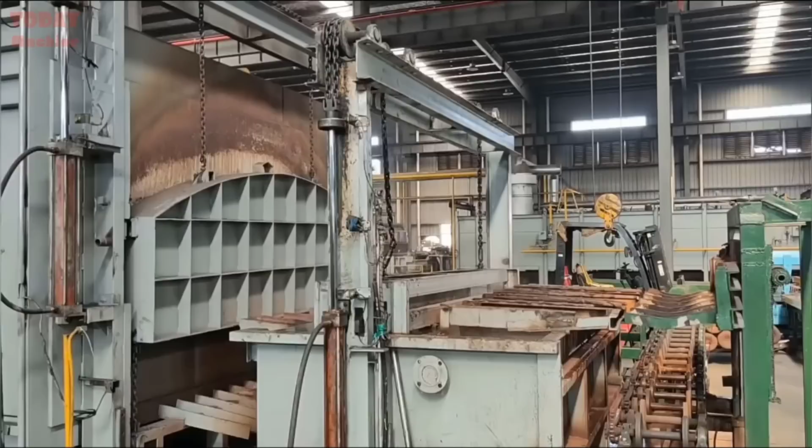Once the desired temperature is reached, the cylinders are subjected to a carefully controlled cooling process. This stage, known as quenching, involves rapidly cooling the cylinders in a controlled manner. The specific temperature and duration of the heat treatment process vary depending on factors such as the steel composition, cylinder size, and intended application.

The heat treatment process offers several benefits. Firstly, it helps to improve the strength and toughness of the cylinders, making them more resistant to external forces and impacts.

Shot blasting is a critical process in gas cylinder manufacturing that prepares the surface of the cylinders for further treatment. It involves placing the cylinders in a specially designed chamber where they are subjected to a high-speed bombardment of steel shots or abrasive particles.

The purpose of shot blasting is to remove any scale, rust, or surface contaminants present on the cylinders. These contaminants can hinder the adhesion of coatings and paints, compromising the overall quality and performance of the cylinders.

The roughened surface created by shot blasting serves multiple purposes. Firstly, it promotes better adhesion during subsequent coating processes. The increased surface roughness provides a greater surface area for the coating material to adhere to, resulting in improved bond strength and durability. This is particularly important for the protective paint coatings applied to the cylinders to enhance corrosion resistance.

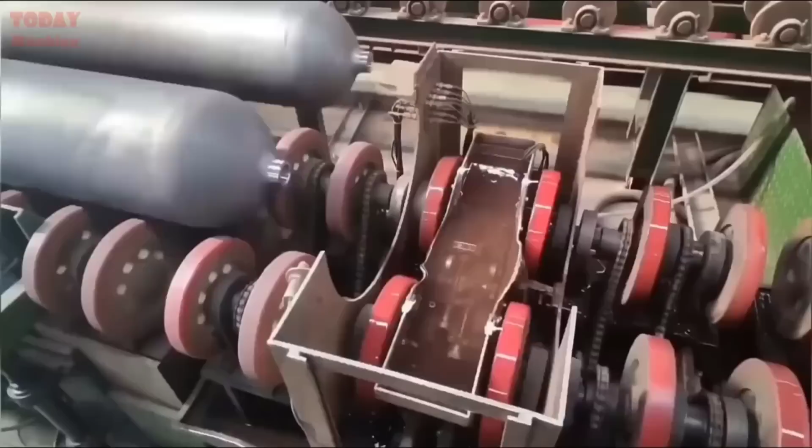The valve installation process requires precision and attention to detail. Highly skilled technicians handle this task to ensure proper alignment and tight sealing between the valve and the cylinder.

Once the valve is installed, it undergoes rigorous quality testing to ensure its proper functionality and leak-free operation. This testing is essential to guarantee the integrity and safety of the gas cylinders.

Pressure tests involve subjecting the valve and cylinder assembly to elevated pressures to verify that it can withstand the intended operating conditions without any leaks or failures.

Once the individual components of the cylinder are prepared, they are assembled together. This includes attaching valves, pistons, seals, and other necessary parts.

Skilled technicians carefully follow assembly instructions and quality control protocols to ensure proper fit, alignment, and functionality of the cylinder.

After assembly, the cylinders undergo rigorous testing to ensure they meet the required performance standards. Common tests include pressure testing and functional testing. These tests verify the cylinder's ability to withstand the intended operating conditions and perform reliably.

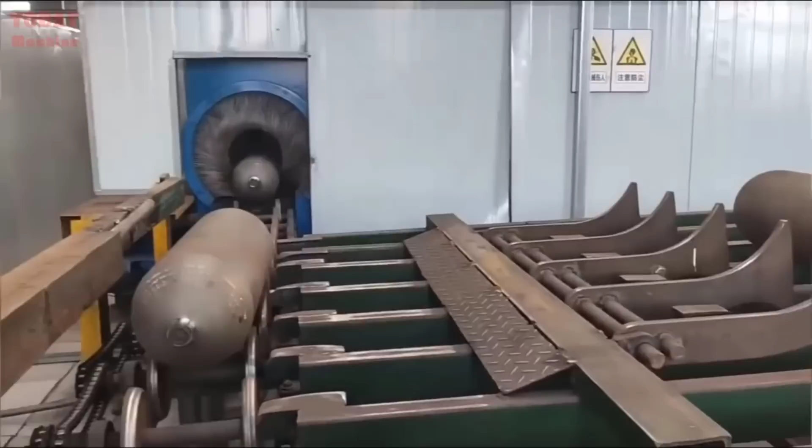Inspections are conducted at various stages, including material inspection, in-process inspection, and final inspection. These inspections involve dimensional measurements, visual examinations, and performance evaluations to identify any defects or deviations from specifications.

Before painting, the surfaces of the spray paint bottles need to be properly prepared. This typically involves cleaning and degreasing the bottles to remove any dirt, oil, or contaminants that could affect the paint adhesion.

Surface preparation may also include sanding or buffing to smoothen any imperfections or rough areas on the bottle surface.

Priming is an optional but often recommended step in the painting process. Primers create a smooth and uniform surface for the paint to adhere to, enhance adhesion, and improve the overall finish.

Primers are typically applied in a thin layer using techniques such as spraying or dipping. The primed bottles are then allowed to dry or undergo a curing process, depending on the specific primer used.

Once the priming stage is complete, the spray paint bottles are ready for the application of the desired paint color or coating.

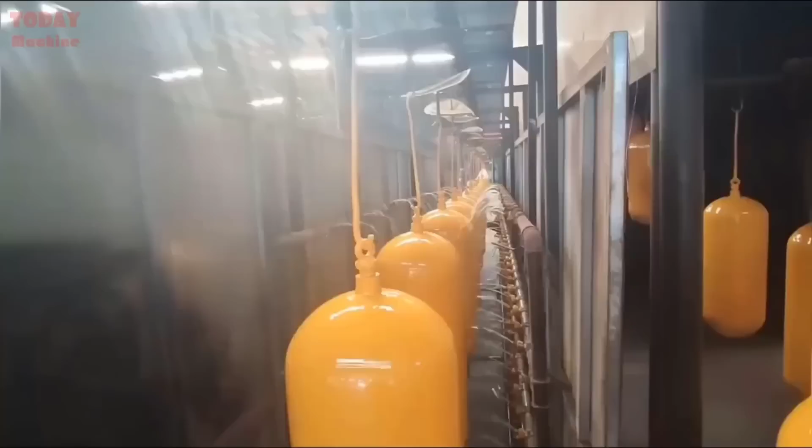The bottles are placed on a conveyor system or held in fixtures, allowing the paint to be applied from different angles for complete coverage. The spraying process requires precise control of paint flow, pressure, and nozzle settings to achieve consistent and uniform results.

The process begins with the acquisition of high-quality billets that meet various national and international standards. These billets serve as the raw material for the production of dependable steel bars.

The heart of AKS's steel production is its state-of-the-art thermal mechanical treatment technology. This technology revolutionizes the steel bar production process in Bangladesh. It starts by heating the billets in a reheating furnace, ensuring the proper temperature for the subsequent rolling process.

The rolling mill, segmented into 3 parts, is a key component. What sets AKS apart is its combination of horizontal and vertical stands in the rolling process.

This innovative approach eliminates the need for continuous turning of billets, which can weaken the steel's inner structure. This sequence of shaping the billets ensures increased material density and strength.

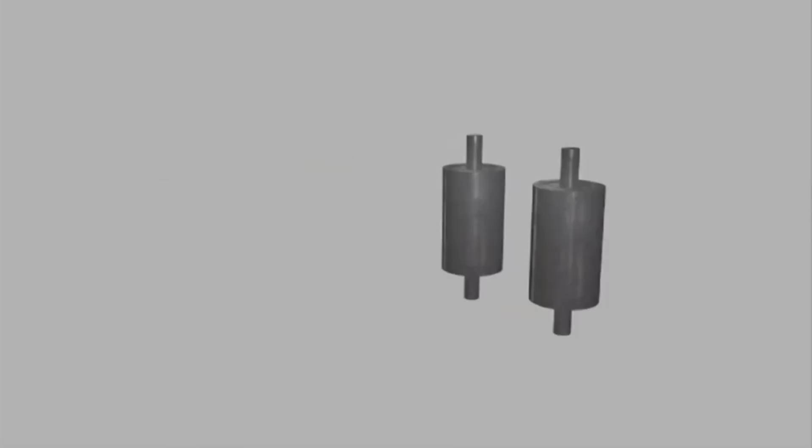The impressive 120-meter-long cooling bed at AKS is a critical component of their steel production process. This extensive cooling bed allows for a gradual and controlled cooling of the freshly rolled steel bars. As the steel bars move along this bed, they cool and solidify, a crucial step in enhancing their structural integrity.

Automated machines are strategically employed at the end of this cooling bed to bind the finished steel bars. These machines play a pivotal role in ensuring uniformity and safety in the final product.

By automating this process, AKS can guarantee consistent quality across all their steel bars, reducing the risk of defects and strengthening the overall structural integrity of the construction materials they produce. This commitment to precision and safety underscores AKS's dedication to delivering top-tier steel products to the market.

Quality control is paramount at AKS. Their state-of-the-art quality laboratory rigorously tests the physical, chemical, and mechanical properties of the steel bars to ensure they meet both national and international standards.

In particular, AKS prides itself on achieving an elongation capacity of 22%, far surpassing the standard for regular steel bars in Bangladesh.

Repkon is a renowned and globally recognized provider of industrial automation solutions, specializing in the design and manufacture of innovative LPG liquefied petroleum gas cylinder welding machines.

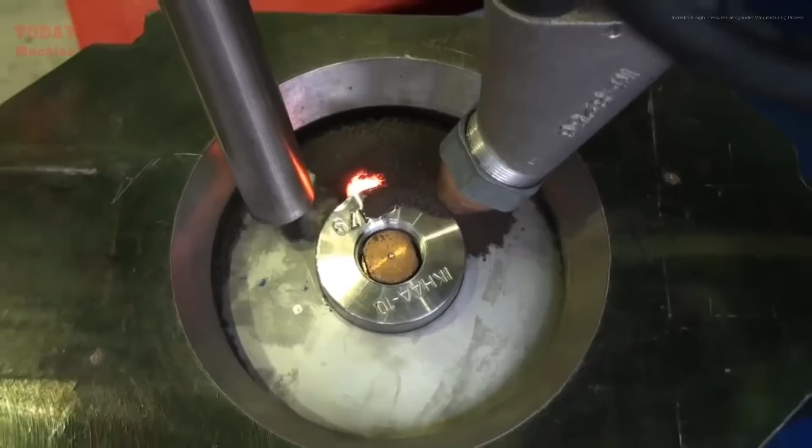The neck ring, which provides a connection point for the valve, is welded to the top end of the cylinder. The valve is then installed securely into the neck ring. The valve is responsible for controlling the flow of LPG into and out of the cylinder.

The neck ring, typically made of brass or other suitable material, is welded to the top end of the cylinder. The neck ring provides a connection point for the valve and ensures a tight seal between the valve and the cylinder.

Once the neck ring is securely welded, the valve is installed into the neck ring. The valve is a crucial component responsible for regulating the flow of LPG into and out of the cylinder.

During the valve installation process, special care is taken to ensure a proper seal between the valve and the neck ring. This is crucial to prevent any gas leaks that could pose a safety hazard.

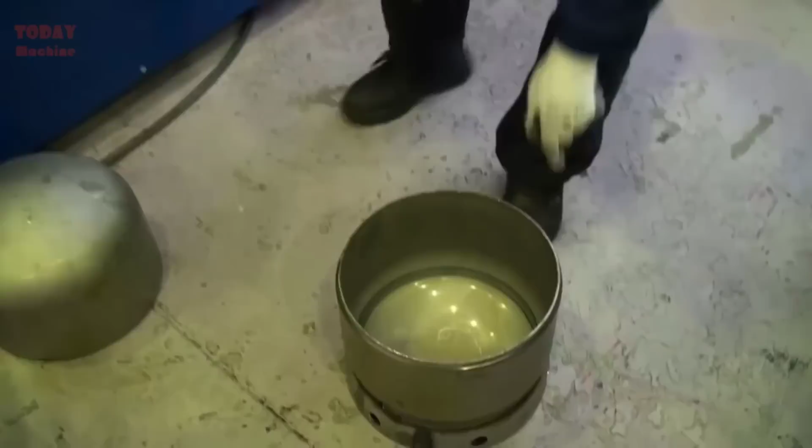Welding plays a crucial role in the production process of LPG cylinders, as it involves joining the cylinder body and bottom end to create a seamless and leak-proof container. The welding process typically employs a combination of electric resistance welding and submerged arc welding techniques.

Electric resistance welding (ERW) is commonly used to join the cylinder body and bottom end. This method involves passing an electric current through the metal components to generate heat, which melts the edges to be joined.

The molten metal is then fused together to form a solid bond. ERW ensures a strong and durable joint between the cylinder body and bottom end.

Submerged arc welding, SAW, is another technique employed in the welding process. It involves the use of a consumable electrode and a flux layer to shield the welding area from atmospheric contamination.

The welding arc is generated beneath the layer of powdered flux, which melts to form a protective slag and shields the weld zone. SAW provides excellent penetration and deposition rates, resulting in a robust and reliable weld between the cylinder body and bottom end.

Once the welding and heat treatment processes are complete, the LPG equipment moves to the hydrostatic testing line. Hydrostatic testing is a crucial step in ensuring the integrity and safety of the equipment.

This test involves pressurizing the equipment with water or another suitable liquid to verify its resistance to leaks or ruptures. During the hydrostatic testing process, the LPG equipment is filled with water and pressurized to a predetermined level.

The equipment is then inspected for any signs of leakage or structural weaknesses. This rigorous testing helps identify any potential flaws or defects that could compromise the equipment's safety. Only equipment that passes this testing phase moves on to the next step.

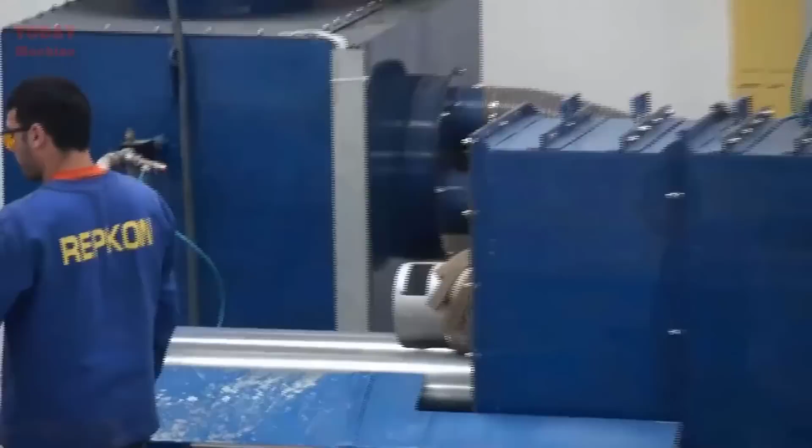Shot blasting effectively prepares the surface by improving its cleanliness, roughness, and overall quality, ensuring optimal coating adhesion and enhancing the durability and longevity of the LPG equipment.

Before the wet painting process begins, the LPG equipment undergoes thorough cleaning to remove any contaminants or residues that could affect the adhesion and quality of the paint. This cleaning may involve processes such as degreasing, washing, and drying.

Once the equipment is properly cleaned, it moves through the wet painting line, where automated or manual spray guns are used to apply the liquid paint coatings. During the painting process, the spray guns release a controlled amount of paint onto the equipment's surface, creating a smooth and consistent layer.

After the paint is applied, the equipment is then moved to a curing oven, where it undergoes a carefully controlled heating process. The oven temperature and duration are set according to the paint manufacturer's specifications to allow the paint to cure properly and form a durable finish.

Quality control is a critical aspect of the wet painting line. The painted equipment is thoroughly inspected for any imperfections, such as color inconsistencies, drips, or surface defects. Any defects identified are rectified, either through manual touch-ups or by sending the equipment back for rework.

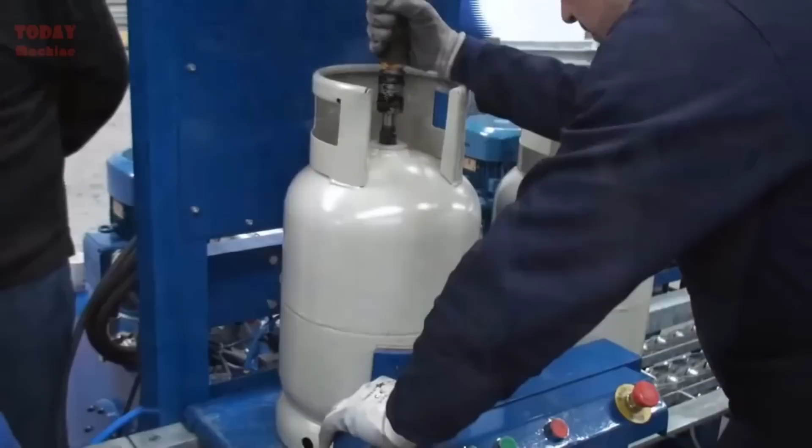The wet painting line ensures that the LPG equipment not only has a visually appealing appearance, but also possesses a protective coating that safeguards it against corrosion and extends its service life.

The proper application of paint in this stage contributes to the overall quality, aesthetics, and longevity of the Repkon LPG production finishing line.

The final step in the manufacturing process of the Repkon LPG production finishing line is the surface coating and finishing line. This step involves applying protective coatings and finishes to enhance the equipment's aesthetics, durability, and resistance to corrosion.

The surface coating process begins with thorough cleaning and preparation of the LPG equipment's surface to ensure proper adhesion of the coating material.

Once the surface is prepared, a suitable coating material is applied. This could be a paint or a specialized protective coating, depending on the specific requirements of the LPG equipment.

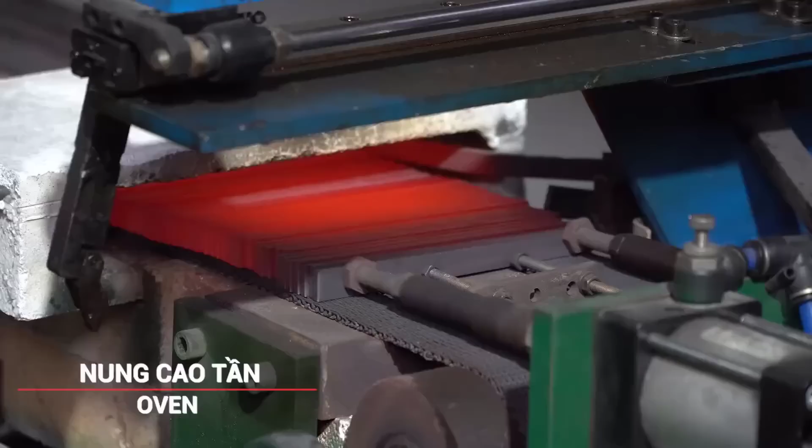Next, the blanks are placed in an oven for tempering. Tempering is a critical step in the knife-making process, as it strengthens the steel and improves its hardness.

Once tempered, the blanks are moved to a CNC, computer numerical control, hammering machine. CNC technology allows for precise shaping of the knife blade.

After hammering, the blades are subjected to profile cutting. This step defines the knife's final shape, including the edge, spine, and handle. Following profile cutting, the knife blades undergo side grinding.

Knife blades are then subjected to grinding, which sharpens the edge to razor-like precision.

To give the knife its distinctive shape and add ergonomics to the handle, the blade is pressed into the handle material. This step is crucial for both the knife's functionality and aesthetics, as it forms a seamless transition between the blade and handle.

After pressing, the blade undergoes another round of grinding, primarily focused on honing the edge to perfection. This step ensures that the knife is exceptionally sharp and ready for use.

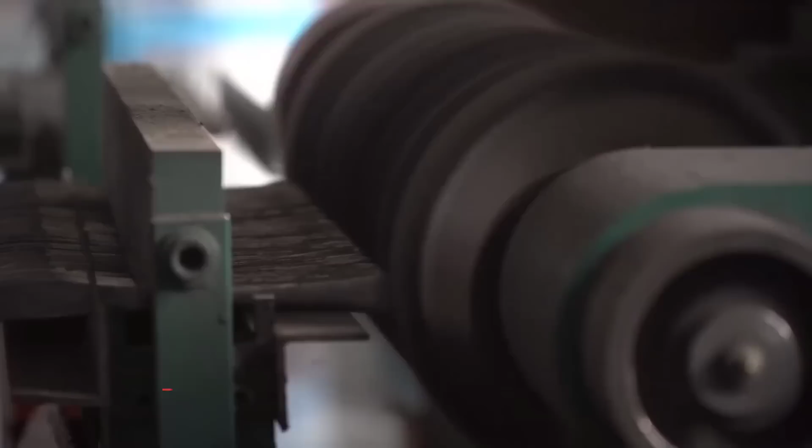To enhance the knife's appearance and remove any surface imperfections, side polishing is performed. This step gives the blade a mirror-like finish and elevates the overall aesthetics of the knife.

The final step involves thorough cleaning and washing of the knives. This not only removes any residual materials, but also ensures that the knives are free from contaminants and ready for packaging and distribution.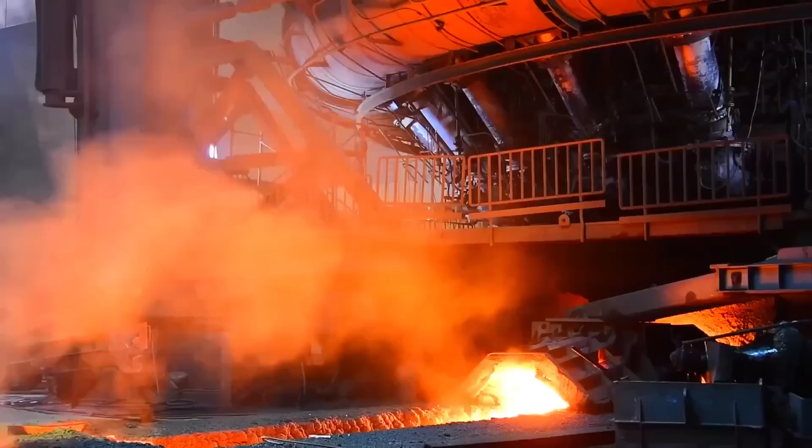The first step is the extraction of iron ore from mines. Iron ore is a natural resource found in the Earth's crust and is typically mined in large open pit or underground mines. The extracted iron ore undergoes processing to remove impurities and improve its quality.

This involves crushing the ore into smaller pieces and then using various techniques such as magnetic separation, flotation, and gravity separation to separate the iron from other minerals.

The processed iron ore is then smelted in a blast furnace. In the blast furnace, iron ore, along with coke, a form of coal, and limestone, is heated to high temperatures.

The pig iron obtained from smelting is further processed in a steelmaking furnace, typically a basic oxygen furnace (BOF), or an electric arc furnace (EAF). In the BOF process, oxygen is blown through the molten pig iron to oxidize impurities, resulting in the production of steel.

Once the steel is produced, it is cast into large, rectangular-shaped blocks called billets or slabs. Casting is done by pouring the molten steel into a mold and allowing it to cool and solidify. The billets or slabs can vary in size, depending on the desired final product.

The steel plates or sheets are subjected to a heat treatment process to improve their mechanical properties, such as strength and toughness. This involves heating the steel to a specific temperature and then cooling it rapidly or gradually, depending on the desired characteristics. The heat-treated steel plates or sheets are then cut into the desired shape and size for leaf spring production.

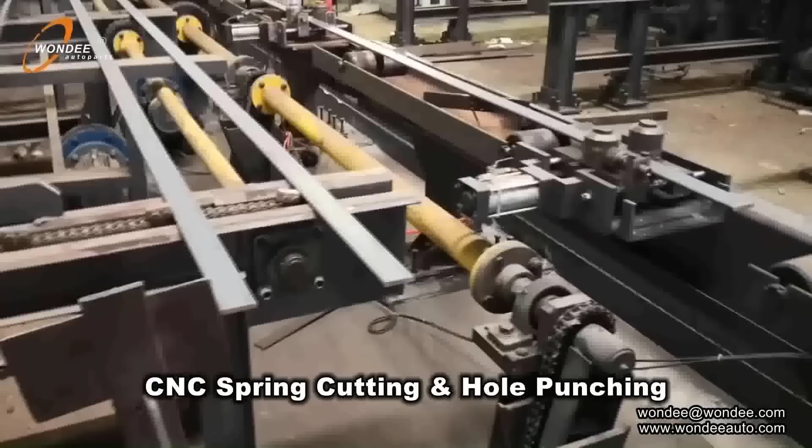The selection process considers factors such as chemical composition, uniformity, and surface condition. The raw material quality plays a crucial role in determining the overall strength and performance of the leaf springs, ensuring that they can withstand heavy loads and provide reliable suspension for vehicles.

In this step, the raw material is straightened to remove any deformations or bends. The coil or flat bar is passed through a series of rollers and presses, exerting force to reshape the material into a straight form. This process ensures uniformity and consistency in the leaf spring's shape.

The next step in the manufacturing process of leaf spring suspension is tapering the leaf spring to achieve the desired shape. Tapering refers to the gradual reduction of the width of the leaf from the center towards the ends. Tapering is performed to ensure that stress is distributed evenly along the spring.

To accomplish tapering, specialized machinery is used. This machinery is designed to apply controlled pressure on the leaf spring, gradually reducing its width. The leaf spring is passed through a series of rollers or presses that exert force on the material, reshaping it into the tapered form. The machinery ensures precision and consistency in achieving the desired tapering profile.

Tapering plays a crucial role in improving the flexibility and load-carrying capacity of the leaf spring. The gradual reduction in width results in a progressive change in the leaf stiffness along its length.

Once the leaf springs have been tapered, they need to be efficiently transported to the subsequent stages of the manufacturing process. To facilitate this, an automatic conveying system is employed, which plays a vital role in maintaining the workflow and minimizing manual handling. The automatic conveying system consists of a series of conveyor belts, rollers, or other mechanical devices that are strategically positioned throughout the manufacturing facility.

The leaf springs, after tapering, are carefully placed onto the conveyor system, either manually or through automated loading mechanisms. The system is equipped with sensors and controls to detect and regulate the movement of the leaf springs.

The automatic conveying system offers several advantages. First and foremost, it improves efficiency by eliminating the need for manual handling and transportation of leaf springs. Moreover, the automatic conveying system helps in maintaining the quality of the leaf springs.

Manual handling can sometimes lead to accidental damage or mishandling, which can affect the integrity of the leaf springs. By using automated conveyors, the risk of such damage is significantly reduced, as the leaf springs are securely and consistently transported without unnecessary jostling or impacts.

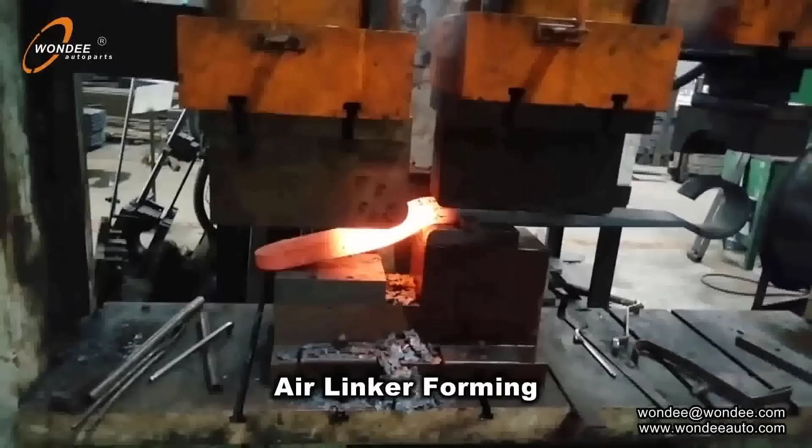Once the tapered leaf springs have been shaped, they undergo a controlled heating process. The leaf springs are heated to a high temperature, typically above the austenitizing temperature of the steel. After the desired temperature is reached, the heated leaf springs are rapidly cooled by immersion in a quenching medium.

The most commonly used quenching media for leaf springs are oil or water. The rapid cooling during quenching induces a transformation in the steel known as martensite formation. By hardening the steel, quenching significantly improves the load-carrying capacity and durability of the leaf springs.

However, it is important to note that the rapid cooling during quenching can introduce internal stresses in the leaf springs. These residual stresses can potentially lead to cracking or distortion. After quenching, the hardened leaf springs are tempered to relieve internal stresses and improve their toughness. Tempering involves reheating the leaf springs to a specific temperature and holding them at that temperature for a predetermined period.

Once the leaf springs have undergone heat treatment and tempering, they are ready for assembly. Leaf spring suspension systems typically consist of multiple leaves stacked on top of each other and held together by center bolts. The leaves are arranged in a specific order, with the longest and thickest leaf positioned at the top, providing the primary support.

During assembly, the leaves are carefully aligned to ensure proper fitment and functionality. Special attention is given to aligning the eyes or holes in each leaf, as they serve as attachment points for the suspension system. Clamps or retaining plates secure the leaves together, preventing movement or separation during operation. The center bolt is inserted through the aligned holes and tightened to provide additional stability to the assembly.

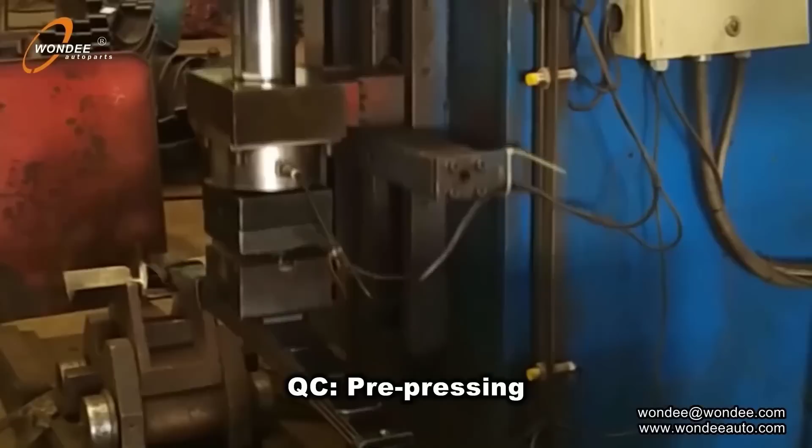Quality control is an essential aspect of leaf spring manufacturing to ensure the longevity and performance of the suspension system. To evaluate fatigue resistance, a sample is subjected to fatigue life testing, applying cyclic loading and unloading forces to simulate real-world conditions. During this testing, the leaf springs undergo repeated cycles of loading and unloading, while their behavior and response are closely monitored.

This testing is typically conducted using specialized equipment that applies controlled forces to the leaf springs. The number of cycles and the applied loads are determined based on industry standards and the specific requirements of the leaf spring design. By subjecting the leaf springs to fatigue life testing, manufacturers can assess their durability and identify potential weaknesses or flaws in the design or manufacturing process, helping ensure the leaf springs meet required performance standards and can withstand expected loads and stresses over their operational lifespan.

After passing quality control tests, the leaf springs are marked with relevant information for identification and traceability purposes. This marking typically includes part numbers, specifications, manufacturing dates, and other relevant details.

To prepare the ingot for rolling and establish its metallurgical properties, preheating is performed. Kaiser Aluminum Warwick employs 2 pusher furnaces for this purpose. Once pliable, the rolling process commences at the reversing mill, where large rollers, powered by 2 robust 7,000 horsepower motors, reduce the thickness of the ingot through a back-and-forth motion.

The initial stage of hot rolling, executed at temperatures around 900 degrees Fahrenheit, leads to a reduction in thickness from 21 inches to 1.5 inches, while also elongating the ingot from 30 feet to a remarkable 400 feet.

Continuing the hot rolling process, a flying shear severs the head and tail of the aluminum slab, marking the transition to the 6-stand continuous mill. Here, the metal is further flattened, achieving a thickness of 1/8 of an inch. This stage culminates in the aluminum being coiled for the first time, resulting in coils that can span up to approximately 1 mile in length.

The subsequent phase, cold rolling, takes place after the metal has cooled to temperatures between 200 to 300 degrees Fahrenheit. The aluminum proceeds to one of Kaiser Warwick's cold mills, where it undergoes further reduction in thickness while traveling at speeds nearing 60 miles per hour. Exiting the cold mill, the aluminum reaches an incredibly thin dimension, measured in thousandths of an inch.

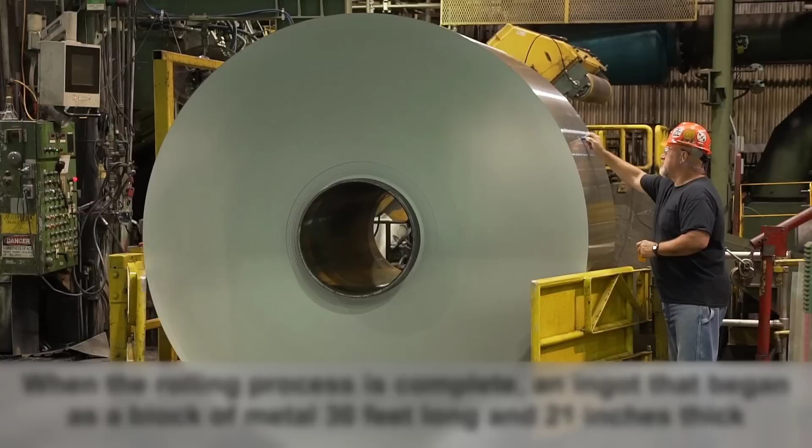Upon completion of the rolling process, the ingot, which once started as a 30-foot-long, 21-inch thick block of metal, is now transformed into a coil that, if unraveled, could extend up to 10 miles in length.

Waste computer board recycling plant.

In our modern digital era, electronic waste, e-waste, has become a significant concern due to its adverse environmental impact. To address this issue, waste computer board recycling plants have emerged as crucial facilities for recycling and recovering valuable materials from discarded electronic devices. These plants employ various machines and processes to dismantle, crush, separate, and screen electronic components and printed circuit boards, PCBs, to extract valuable resources while minimizing environmental harm.

PCB dismantling machine: remove components. One of the initial steps in the recycling process is the PCB dismantling machine, which efficiently removes electronic components from waste PCBs. This machine utilizes advanced technologies and tools to disassemble the circuit boards, ensuring the safe removal of valuable components while minimizing damage to the components themselves.

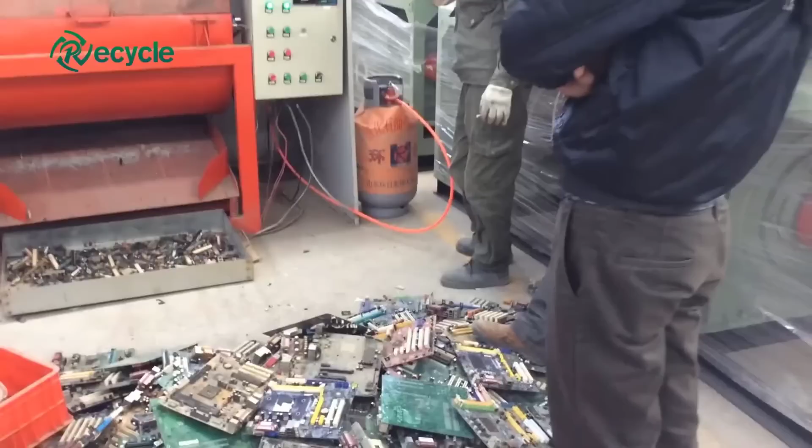Waste electronic components. After the PCBs are dismantled, the next step is to deal with the waste electronic components. These components, such as resistors, capacitors, and integrated circuits, may still hold value and can be reused or sold for secondary purposes. Separating and sorting these components is essential for maximizing resource recovery and minimizing waste.

Waste PCB motherboards. The waste PCB motherboards, once stripped of their electronic components, undergo further processing. These motherboards contain precious metals like gold, silver, and palladium, as well as copper and other recyclable materials. Proper handling and processing of these boards are necessary to extract these valuable resources in an efficient and environmentally friendly manner.

PCB motherboards crushing and separating machine. To extract the valuable materials from waste PCB motherboards, a crushing and separating machine is employed. This machine breaks down the boards into smaller pieces, facilitating subsequent separation processes. The crushed PCBs are then fed into the machine, which utilizes mechanical and physical methods to separate different materials based on their properties.

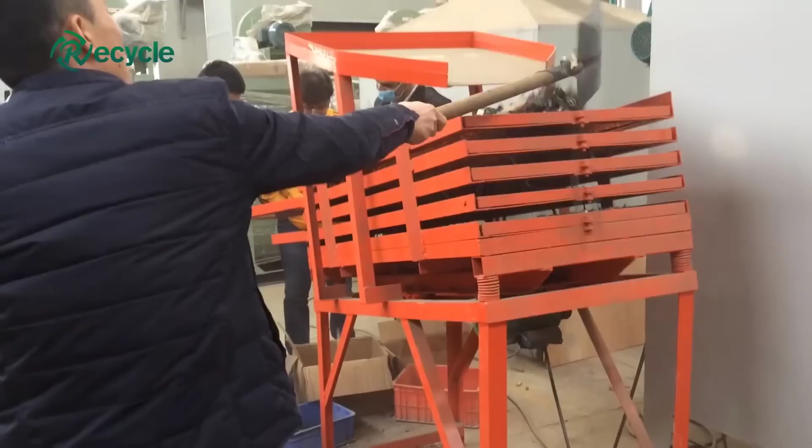Electronic components screening machine. Once the PCBs are crushed and the valuable materials are separated, the electronic components obtained earlier in the process undergo a screening phase. An electronic components screening machine is used to sort and categorize these components based on their condition and quality. This ensures that functional and reusable components are identified for potential resale or reuse, while damaged or non-functional components are properly disposed of or recycled.

The first step in the manufacturing process is the design and material selection phase. Engineers and designers work together to develop an optimal design that meets safety standards and regulatory requirements. The P50 composite extinguisher is typically made from a combination of lightweight composite materials, such as aramid fiber reinforced polymer, which provides high strength and durability.

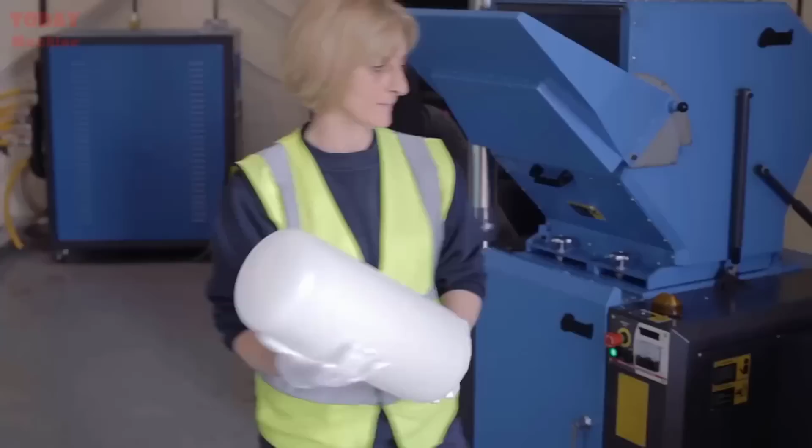The cylinder is a crucial component of the P50 composite extinguisher. The manufacturing of the composite cylinder involves several steps. First, the composite material is prepared by combining resin and reinforcing fibers. This mixture is then wound around a cylindrical mandrel in a precise pattern to ensure uniform strength and thickness. The wound composite is then cured in an oven to harden the resin and create a rigid structure.

Once the composite cylinder is manufactured, the next step is to install the valve assembly. The valve serves as the control mechanism for discharging the extinguishing agent. Skilled technicians carefully install the valve onto the cylinder, ensuring a secure and leak-proof connection. The valve is typically made from durable materials such as brass or stainless steel, to withstand high pressure and corrosive environments.

After the valve installation, the composite cylinder undergoes rigorous pressure testing to ensure its integrity and safety. The cylinder is pressurized to a specific level, and it must hold the pressure for a specified duration without any leakage. Once the composite cylinder passes the pressure testing, it is ready for the filling of the extinguishing agent.

The type of extinguishing agent used depends on the intended application of the P50 extinguisher. Common agents include water, foam, or dry chemical powders. The filling process is carried out with precision to ensure accurate quantities of the extinguishing agent are added.

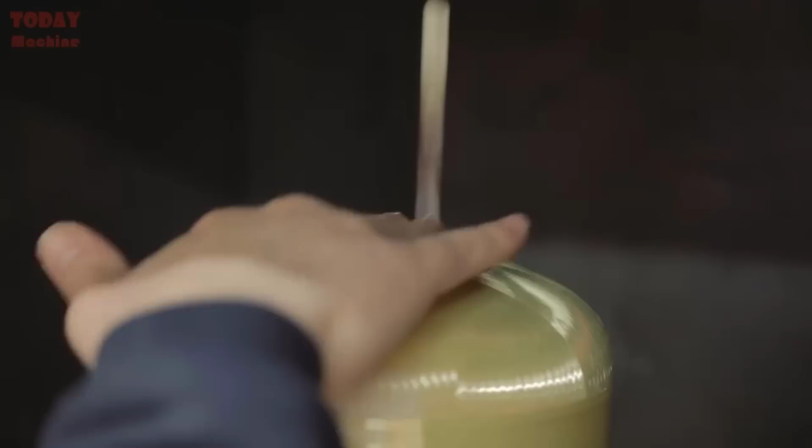After the extinguishing agent is filled, the P50 composite extinguisher undergoes final assembly. This includes attaching the discharge hose and nozzle, pressure gauge, and safety pin. Each component is carefully inspected and tested to ensure proper functionality and adherence to quality standards. The extinguisher is also visually inspected for any cosmetic defects or imperfections.

After the extinguishing agent is filled, the P50 composite extinguisher undergoes final assembly, including attaching the discharge hose and nozzle, pressure gauge, and safety pin. Each component is carefully inspected and tested to ensure proper functionality and adherence to quality standards, and the extinguisher is visually inspected for any cosmetic defects or imperfections.

Once the manufacturing process is complete, the P50 composite extinguishers are packaged and prepared for distribution. They are typically packed in protective cartons or cases to prevent damage during transportation. Labeling and instructional materials are included to provide users with essential information on operating the extinguisher effectively.